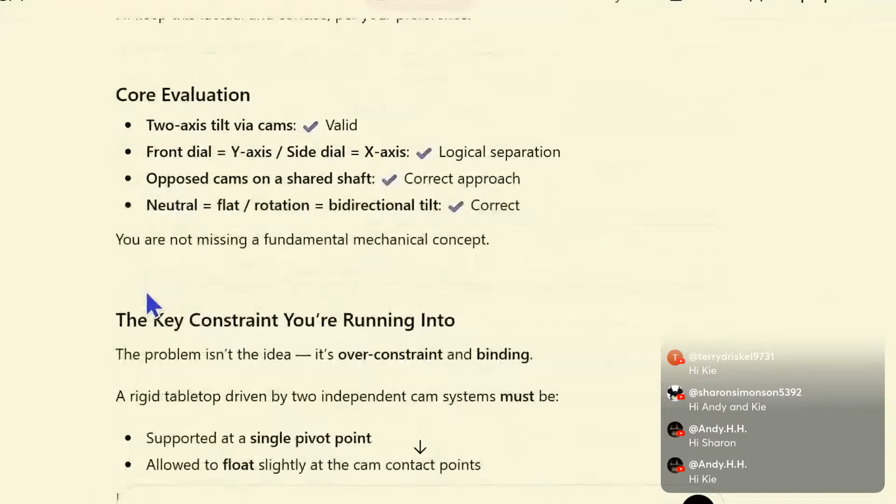And when I put that question to ChatGPT, it responded as such: Your concept is sound and mechanically valid. What you're describing already exists in principle. It's essentially a manual 2-axis tilt table driven by opposed eccentric cams, just implemented in a compact tabletop maze form.

I'll keep this factual and concise per your preference. Core evaluation: 2-axis tilt via cams, valid. Front dial, Y-axis; side dial, X-axis, logical separation. Opposed cams on a shared shaft, correct approach. Neutral equals flat. Rotation equals bidirectional tilt, correct. You are not missing a fundamental mechanical concept.

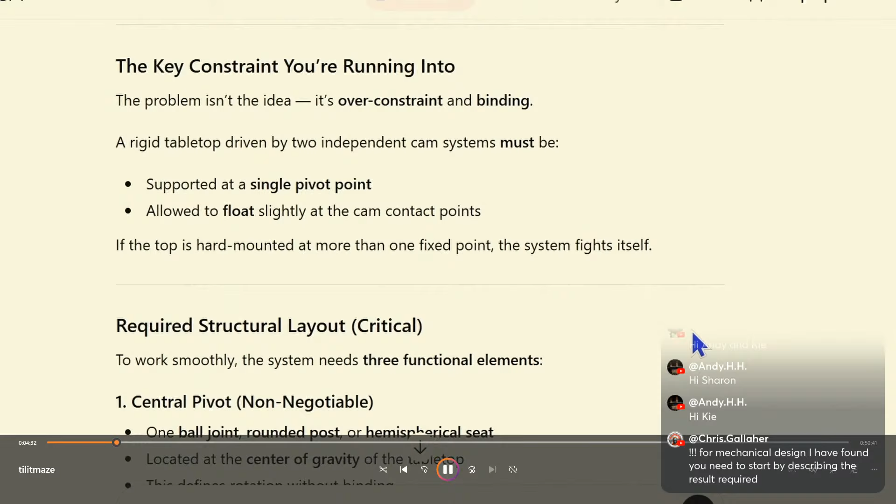The key constraint you're running into, the problem isn't the idea, it's over-constraint and binding. A rigid tabletop driven by 2 independent cam systems must be supported at a single pivot point, allowed to float slightly at the cam contact points. If the top is hard mounted at more than one fixed point, the system fights itself.

Required structural layout is critical. To work smoothly, the system needs 3 functional elements. One, central pivot, non-negotiable: one ball joint, rounded post, or hemispherical seat, located at the center of gravity of the tabletop. This defines rotation without binding. Think camera tripod head, not door hinge.

Two, independent cam axes. Each axis has a single shaft with 2 identical eccentric cams, 1 on each end. Cams push upward only. Why 2 cams per axis: prevents twisting, maintains plane integrity. Three, floating contact points. Cams must contact the underside of the tabletop via UHMW pads, brass wear plates, or captured rollers. No rigid fastening between cam and table.

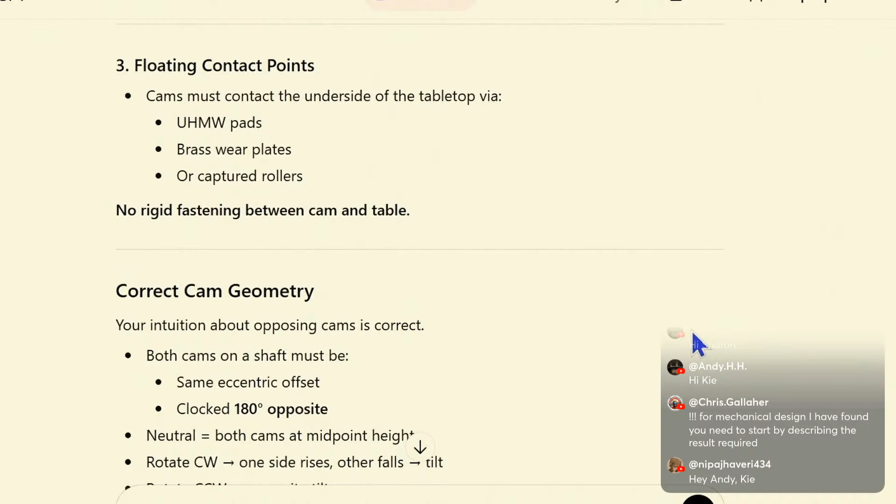Correct cam geometry: your intuition about opposing cams is correct. Both cams on a shaft must have the same eccentric offset, clocked 180 degrees opposite. Neutral is both cams at midpoint height. Rotate clockwise, one side rises, other falls, tilt.

Rotate counter-clockwise, opposite tilt. To explain why your mental model feels incomplete: a cam alone cannot define rotation. Without a central pivot, one cam lifts, the other resists. The table binds or rocks unpredictably. Your brain is correctly detecting a missing degree of freedom.

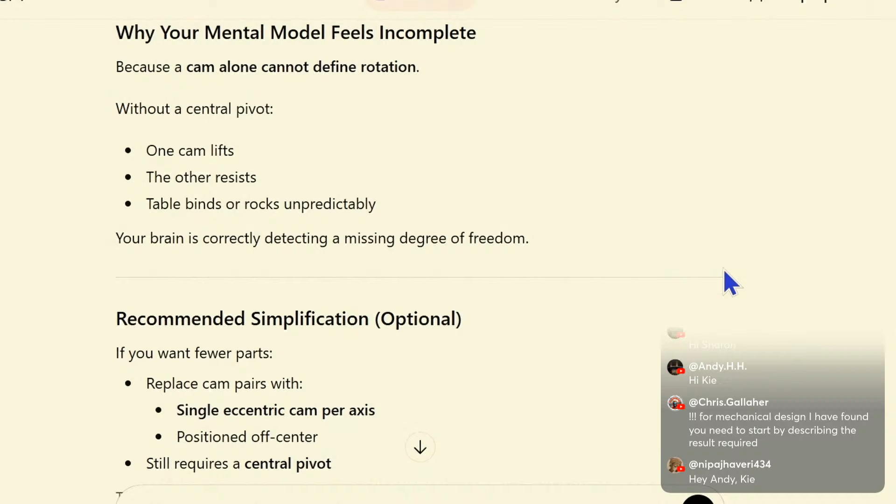Recommended simplification, optional: if you want fewer parts, replace cam pairs with a single eccentric cam per axis positioned off center, but it still requires a central pivot. This reduces precision but works for a maze game. Lightburn relevant design tip: when designing the maze, avoid sharp vertical walls, use filleted corners. Ball diameter should be 2 times wall height. This compensates for sudden tilt transitions.

Bottom line, your concept is mechanically correct. The missing piece is a single central pivot. Cams must push, not constrain. Floating contact surfaces are mandatory. Once you add that pivot in your mental model, the entire system should click into place.

Okay, so there was a lot of good information in that. The non-wearing part, it used some type of non-wearing thin plastic that you can adhere to the bottom where the cams are going to contact the plates as they're rotating, so you don't wear. Without that, you'd eventually wear a groove into it.

Well, I don't think this is going to, if it was in a commercial application, I could see that being absolute. But for this being just a little home game that's going to be played with for once in a while, or maybe for a few weeks and then put it on the shelf and collect dust, I don't think that's something I'm going to worry about.

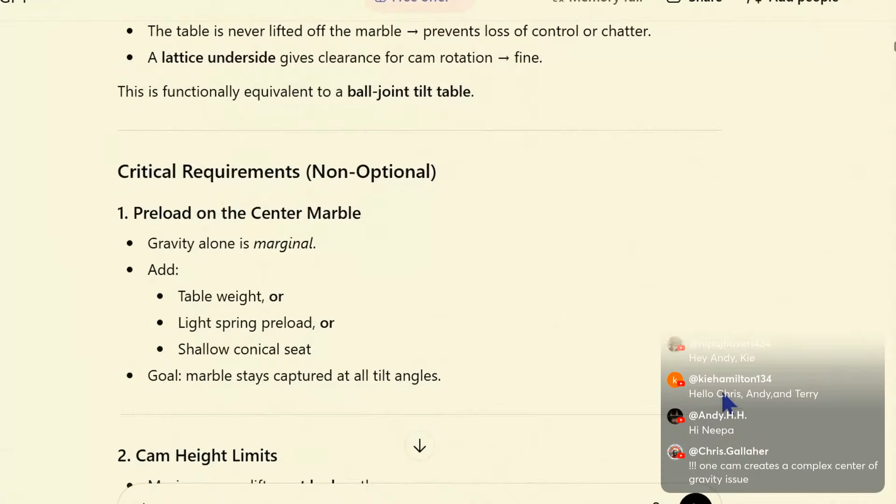Critical requirements, non-optional: 1. Preload on the center marble—gravity alone is marginal, so add table weight, a light spring preload, or a shallow conical seat. Goal: marble stays captured at all tilt angles. 2. Cam height limits: maximum cam lift must be less than the vertical travel that would unload the marble. In practice, cam lift should be 40 to 60% of allowable tilt height. This prevents the table from floating on the cams.

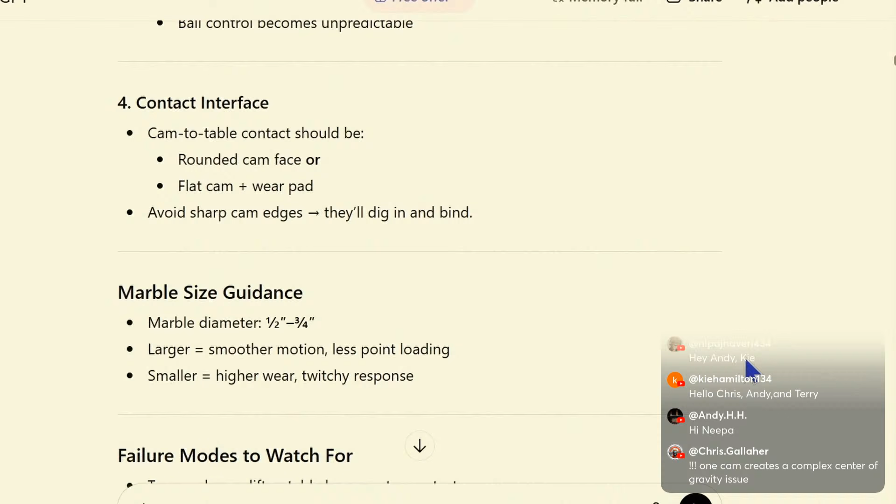The lattice must be torsionally stiff and symmetrical—if it flexes, tilt becomes nonlinear and ball control becomes unpredictable. Contact interface: cam to table contact should use a rounded cam face or flat cam plus wear pad; avoid sharp cam edges, as they'll dig in and bind. Marble size guidance: larger marble equals smoother motion and less point loading; smaller equals higher wear and twitchy response.

Failure modes to watch for: too much cam lift causes the table to lose center contact; no preload causes chatter at neutral; a weak lattice causes twisting instead of pure tilt; cams misclocked causes diagonal bias. Verdict: your lattice plus center marble pivot concept is sound. It will produce smooth, intuitive tilt. It's laser friendly and elegant. You've effectively reinvented a kinematic mount using hobby scale parts. As long as the marble remains the sole constraint point, the system will behave exactly as you're envisioning.

So I'm learning more, and I'm designing in Lightburn as I go, putting some potential designs together, making mistakes. I'm going to include the entire journey of this where I'm implementing and creating parts of the design—I may or may not end up using those in the final piece, but I'm going to show you this entire journey as we go.

So next I asked it: how about a simple disc cut out and glued to the center underside of the table, with an inward offset cutout to allow the pivot marble to engage in it? Essentially, cut out a ring, glue it in the center, and then put the marble in the center of that ring.

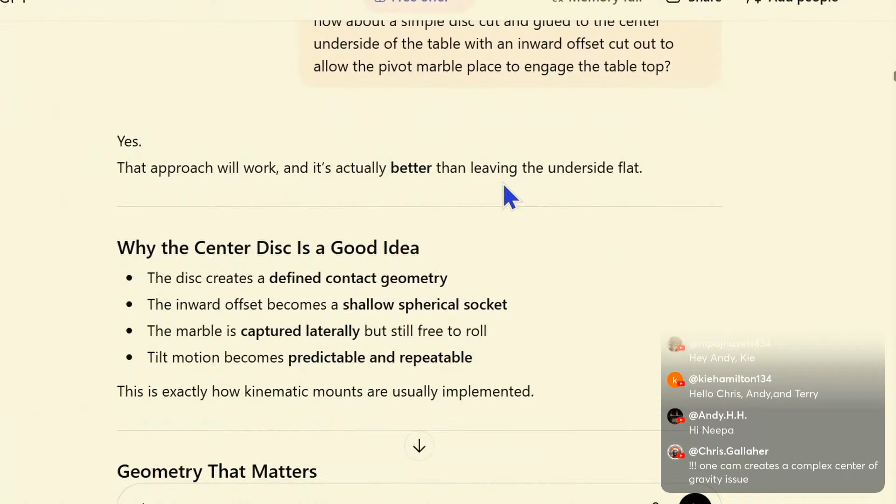It said yeah, it's actually better than leaving it flat on the underside, and went into detail about how to do that and why it works. Then it kept talking about ultra high molecular weight polyethylene, which it recommended to prevent wearing, noting it's actually self-lubricated. This was way more than what I needed to do.

So then I went on down and said, well, what about the clear plastic sheets I purchased for picture frames, in place of the UHMW? It said yeah, that'll work. We go on, and I end up not doing any of that because I don't think I'm going to need that for my home game.

Then I asked: when it comes to positioning the cams, should they be closer to the pivot point or as far away as possible? It said as far away as possible—that's the correct placement. Why distance matters: the cam produces linear lift, but the table responds in angular rotation. Angular change equals lift divided by distance from pivot, so farther from the pivot, smaller lift is required.

Place cams near the perimeter of the tabletop. Keep them symmetrical about the pivot. Leave enough margin so the table doesn't teeter off the pivot, so the lattice remains stiff. Rule of thumb: cam radius should be 70 to 90% of the table half-width.

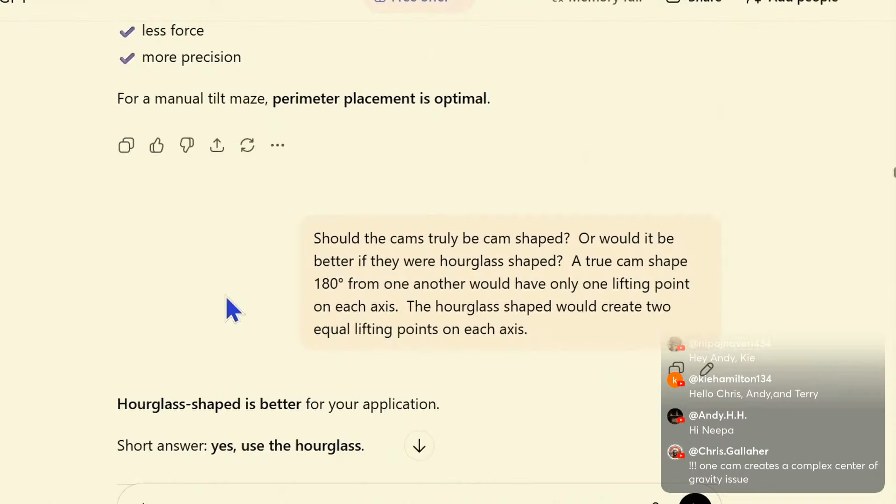Should the cams truly be cam-shaped, or would it be better if they were hourglass-shaped? A true cam shape, 180 degrees from one another, would have only one lifting point on each axis. The hourglass shape would create two equal lifting points on each axis.

And it replied: hourglass shaped is better for your application. Short answer, yes, use the hourglass.

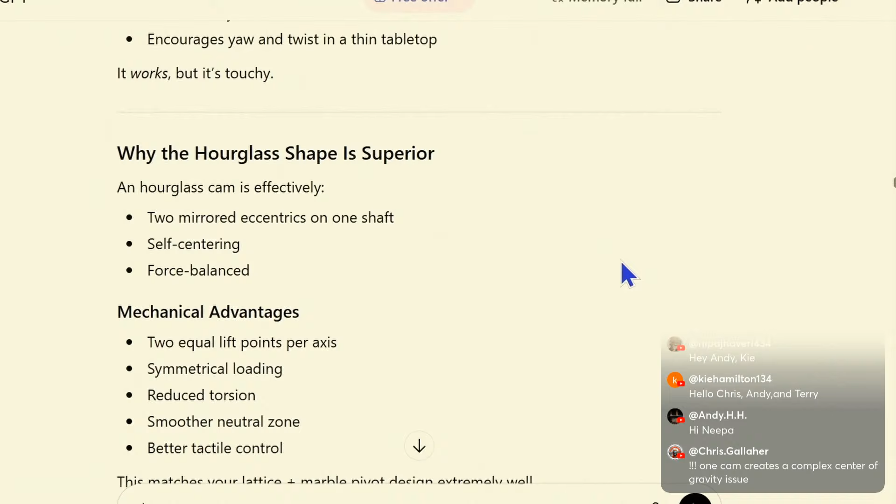Why a true eccentric cam is suboptimal: a simple eccentric cam has one lift lobe, creates a single contact point per axis, produces asymmetric force, and encourages yaw and twist in a thin tabletop. It works, but it's touchy.

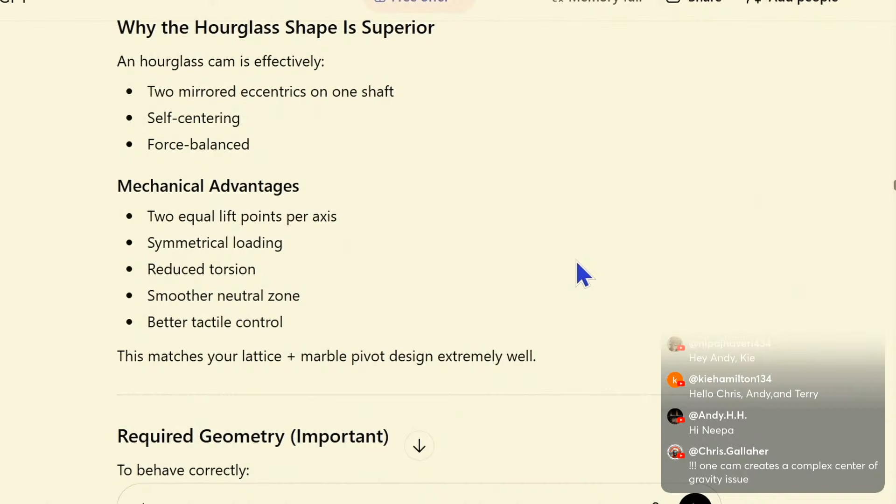Why the hourglass shape is superior: an hourglass cam is effectively two mirrored eccentrics on one shaft, self-centering, force-balanced. Mechanical advantages include two equal lift points per axis, symmetrical loading, reduced torsion, smoother neutral zone, and better tactile control. This matches your lattice marble pivot design extremely well.

Required geometry is important. To behave correctly, the two lobes must have identical radius, identical eccentric offset, and be clocked 180 degrees apart. The waist must clear the lattice at full rotation. For neutral behavior, the waist under the table equals neutral.

Rotate clockwise, one lobe rises while the opposite falls. Rotate counterclockwise, reversed. You get bidirectional tilt without dead spots.

Fabrication notes: cut as a laminated profile, stacked layers, or a single thick disc if material allows. Light edge rounding reduces wear. Add plastic wear pads on the table.

Bottom line: hourglass cams give balanced, predictable tilt, less binding, better feel, and more forgiving alignment. For a precision feel device like a tilt maze, the hourglass geometry is the correct choice.

There are still some caveats that I have not run into in my mental design process. I'm not using any other software besides Lightburn. I'm not using any 3D CAD that would help me see those interferences as I'm designing. So I'm having to do all this in my mind, and that's a scary place, I've told you.

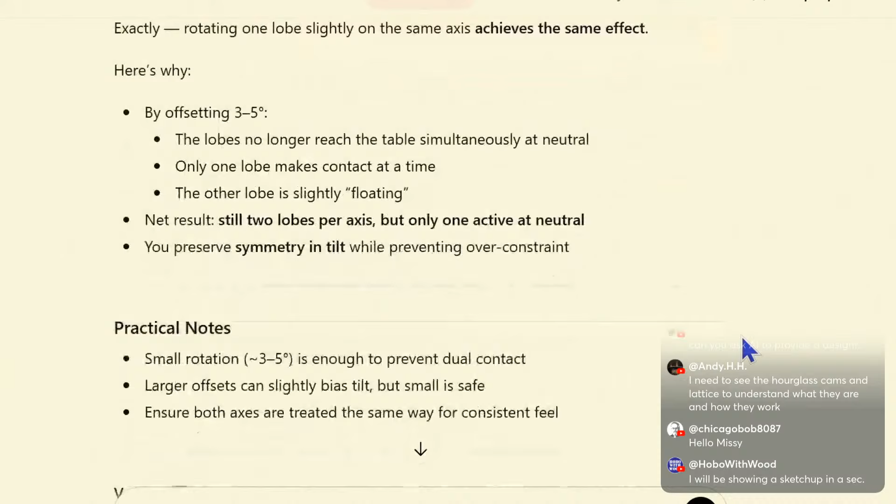Exactly. Rotating one lobe slightly on the same axis achieves the same effect. Here's why: by offsetting 3 to 5 degrees, the lobes no longer reach the table simultaneously at neutral. Only one lobe makes contact at a time; the other lobe is slightly floating. Net result: still two lobes per axis, but only one active at neutral. You preserve symmetry in tilt while preventing over-constraint.

This configuration should create at most a 3-point contact, right? And it said yes. I'm like, okay.

All right, then I said, I've been thinking about the hourglass shape of the cam as opposed to the standard single-sided cam. If the cams are offset from each other 3 to 5 degrees, one of the cams would never actually come into contact with the bottom of the maze unless it got uneven. Is the hourglass shape actually necessary? Maybe standard opposing cams that were slightly rotated on the dowel 3 to 5 degrees would prevent the opportunity of both cams making contact with the bottom of the board at the same time, or is the hourglass shape needed?

So now I'm starting to question, do I need to do the hourglass? I still haven't gotten to the intersection of the X and Y yet, but I'm starting to draw. I'm like, okay, I don't know that the hourglass is going to be beneficial or even needed. And that's what I asked it, and it replied.

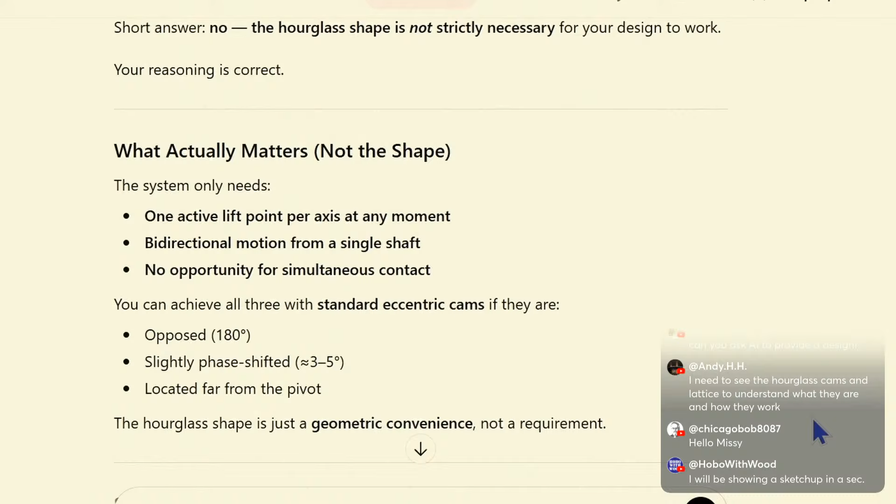Short answer, no. The hourglass shape is not strictly necessary for your design to work. Your reasoning is correct. What actually matters is not the shape. The system only needs one active lift point per axis at any moment, bidirectional motion from a single shaft, no opportunity for simultaneous contact. You can achieve all three with standard eccentric cams if they are opposed 180 degrees, slightly phase shifted 3-5 degrees, located far from the pivot. The hourglass shape is just a geometric convenience, not a requirement.

Standard opposing cams set: this configuration gives you one cam lifting while the other floats. No over constraint, full bidirectional tilt, simpler fabrication, easier tuning, shim or rotate. Mechanically, this is equivalent to the hourglass solution for a maze.

What the hourglass actually adds: guaranteed symmetry without tuning, self-centering neutral feel, two potential lift points if geometry drifts. Those benefits matter more in high precision fixtures, heavier loads, and automated systems.

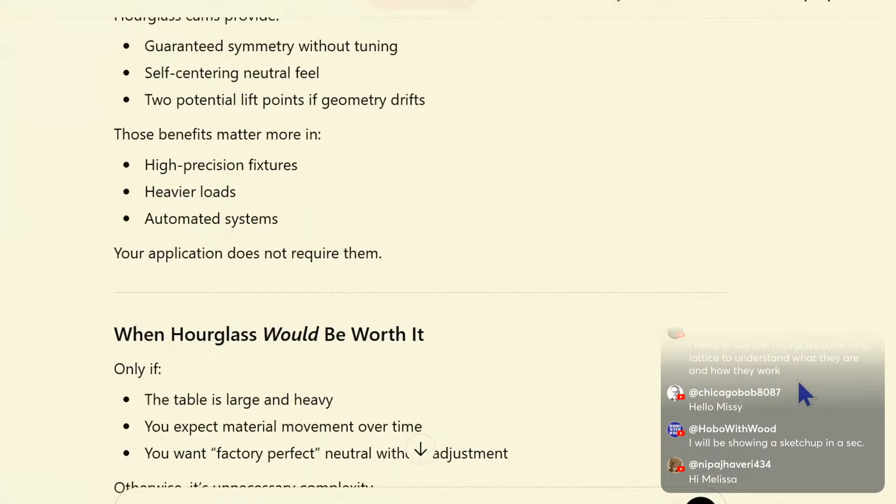Your application does not require them. When would hourglass be worth it? Only if the table is large and heavy, you expect material movement over time, or you want factory perfect neutral without adjustment. Otherwise, it's unnecessary complexity.

Recommendation, practical: for your project, use simple eccentric cams, mount them opposed on the shaft, rotate one cam 3 to 5 degrees, use wear pads under the table, and keep the center marble preloaded.

This is mechanically clean, easy to build, and fully correct. Bottom line, hourglass cams are optional, not required. Standard cams with slight phase offset work just as well here. Simpler design equals fewer failure modes. Your instinct to simplify is right.

Okay, so I'm making progress, and in fact, I go through a whole lot of drawing and test fitting and conceptualizing in Lightburn for the actual dowels and cams before I even begin to draw the box and the lattice and everything else that's going to be needed.

As far as the exact information, I had to rough out the box and create where the marble location is going to be, so I know where the maze tabletop is going to be setting on the marble, so I know where the cam is going to come into contact with the bottom of that maze. So I have to have that geometry prefigured so I know how to design the cams.

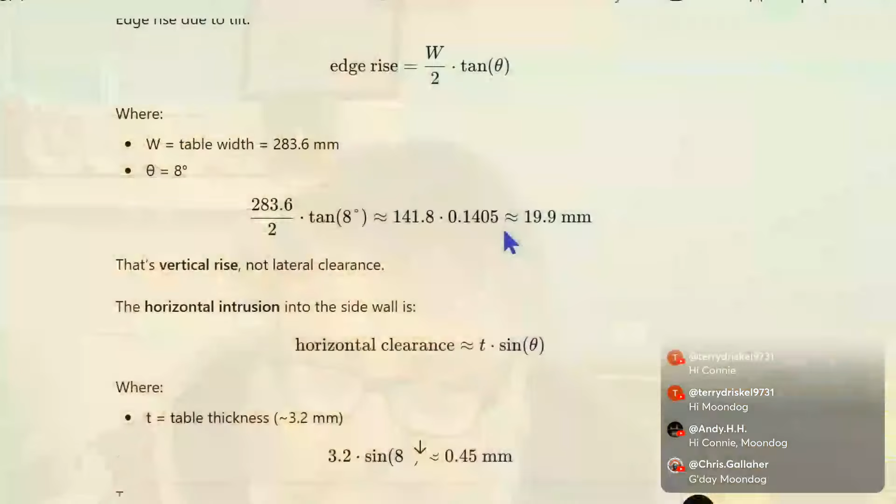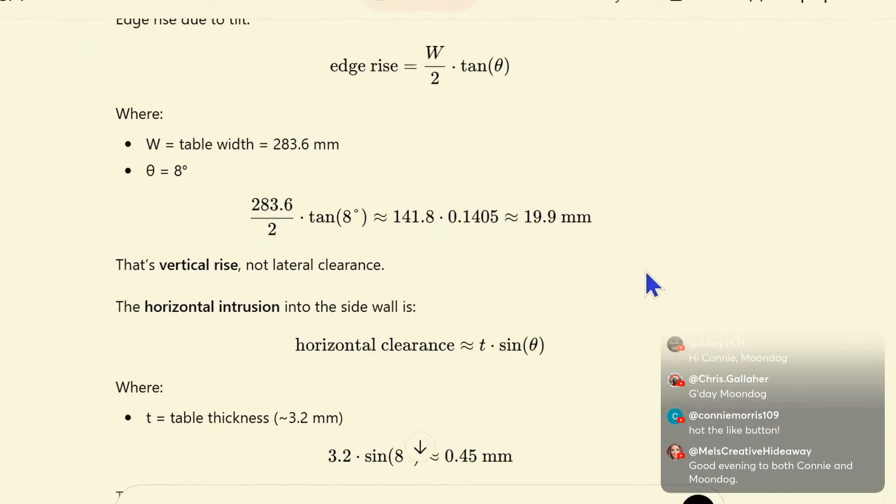Practical maze tilt angles: for a marble maze, useful tilt runs 5 to 8 degrees. Above 10 degrees, the marble becomes uncontrollable. Will design for 8 degrees max. Clearance math, simple and safe: edge rise due to tilt. Edge rise equals W over 2 times tangent of the tilt angle, where W equals table width, 283.6 millimeters. That calculates to approximately 141.8 times 0.1405, approximately 19.9. That's vertical rise, not lateral clearance. The horizontal intrusion into the side wall is approximately T, where T equals table thickness, 3.2 millimeters.

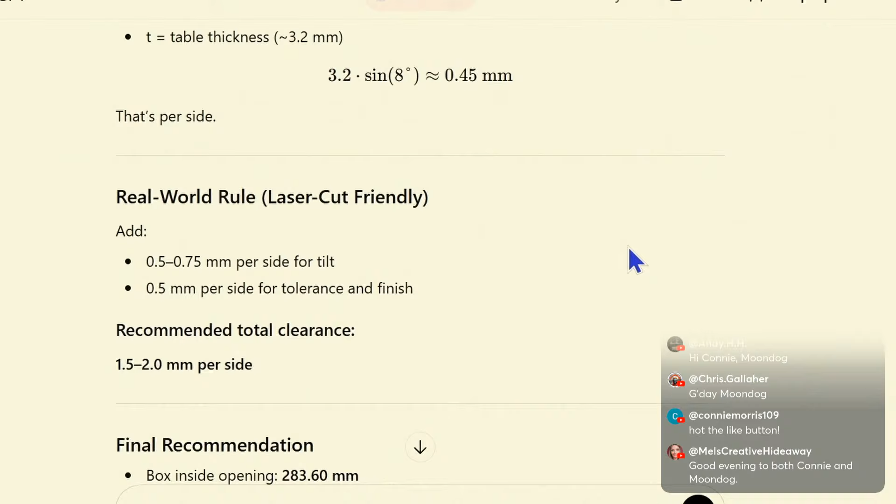0.45 per side is a real world rule, laser cut friendly. Add 0.5 to 0.75 millimeter per side for tilt, 0.5 millimeter per side for tolerance and finish. Recommended total clearance is 1.5 to 2.0 millimeters per side.

Bottom line, small enough is not a guess. For your dimensions and tilt range, open quote, 3.5 millimeters total undersize, 1.75 millimeters per side, is the sweet spot, close quote. That will feel intentional, not loose.

Did you get all that? I didn't, but all that matters is it told me what the bottom line is, what it needed to be for those dimensions.

And it's a good thing I didn't have to do all the math. I could have actually told ChatGPT to forego all the explanations and just give me the answer. But you can see here that there needs to be a lot of thought that goes into it, especially when you're creating mechanical pieces. There's a lot to consider.

That's why the price of my designs have the price that they have. Even when I'm using ChatGPT like this, it's recognizing the need, even though I don't know how to do it myself. I recognize the need for these allowances and all that, and I can get by with hopefully just version 2.0 and have a design ready for you guys.

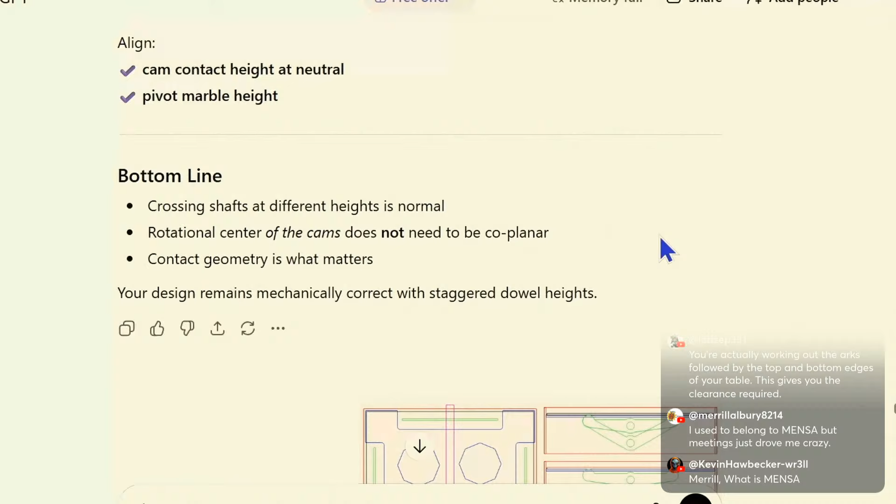Common mistake to avoid: do not try to align dowel center lines, shaft heights, or cam base circles. Align cam contact height at neutral pivot, marble height. Bottom line: crossing shafts at different heights is normal, rotational center of the cams does not need to be coplanar. Contact geometry is what matters. Your design remains mechanically correct with staggered dowel heights.

So I'm starting to get some sketches done in Lightburn, and in my initial draw up of this, I did make a mistake.

I actually made several mistakes. Even when I thought I had them all corrected and cut out the first prototype, there were still some adjustments that needed to go back and be made. One of the things I failed to do is accurately allow for the height of the pivot point of the marble. I didn't have that position correct. But I ended up drawing and sketching all this out in Lightburn.

In ChatGPT, you're able to upload images and ask it to look at these and tell me what you think. So I don't know if I can... yeah, I can. So here is an image, and I'm going to show you this and explain a little bit.

This is going to look very confusing, but this over here is the lattice. The blue is just the lattice shape. The green is the cams. The pink is the dowel. This area here is just cut out waste to decrease the weight of the overall piece. And the orange here was that ring that I was going to put in the center to position the marble for the center point.

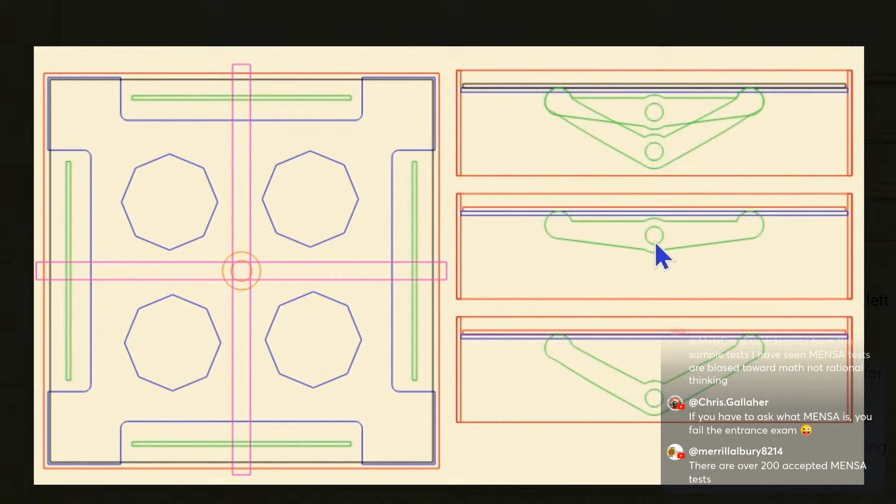This is a top-down view looking at the lattice and the positioning of everything. This is a side view. This is, say, I don't know if this was X or Y, and this was the other opposing, and then this is the two combined. So here you can see I've got one dowel up high, one down low. Whenever you position them with one over the other, you got plenty of clearance here. You can see the shape of the cams I've created, and if you were able to zoom in here, the points of contact are exactly the same, even though the shapes are completely different.

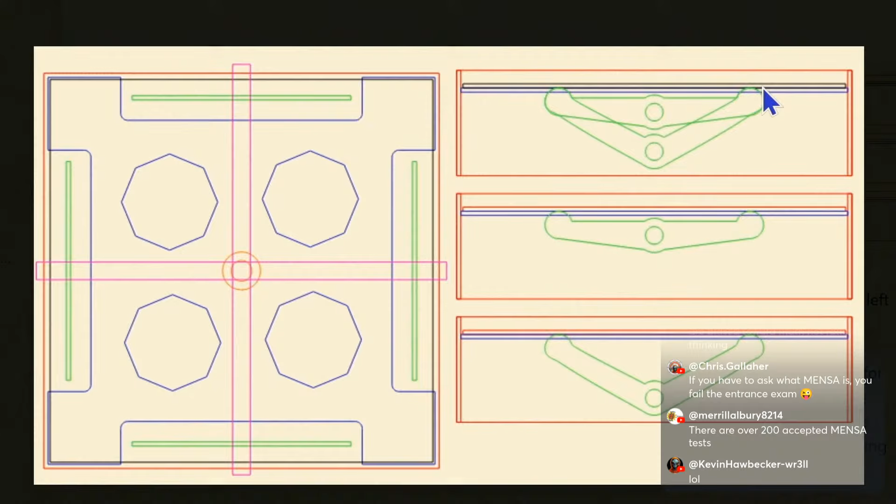So I said, I'm going to share a couple of drawings with you. The leftmost is a top-down view. The red layer is the outer perimeter. The blue layer is the lattice that will rest just beneath the maze top. The black layer is the perimeter for the maze top. The green layer represents the cams. The pink layer is the dowel positioning, and the orange is the center pivot ring. There will be a ring on the lattice and on the bottom of the maze. The top right is a side profile that shows positioning of the axis in relation to one another. Right, middle, and bottom show the individual side profiles and the positioning of the cams.

Do you see a problem so far? And it replies: I see what you're doing, and overall this is a coherent, workable layout. Nothing jumps out as a fundamental flaw. I'll go through it systematically and point out the few things to watch, not redesign it. High level verdict: geometry is sound, degrees of freedom are correct, no obvious overconstraint, shaft crossing handled correctly, cam logic matches the earlier discussion. You're past the concept risk stage. This is now in tolerance and execution territory.

Top-down view left, what looks good? Cam placement near the perimeter, correct leverage, symmetry about the pivot, predictable tilt, central marble ring alignment, correct reference, lattice clearance slots, you've anticipated cam sweep, no issues here. One thing to check: the green cam sweep slots in the lattice, make sure they clear the full cam envelope, not just the lobe. Include a little angular over-travel, 5 to 10 degree safety. This is a common 'looks fine in CAD, rubs in reality' point.

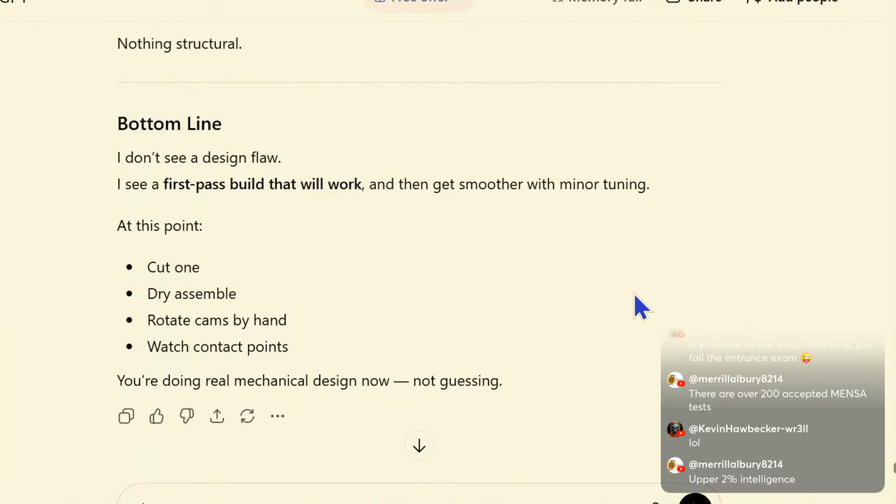Bottom line, I don't see a design flaw. I see a first pass build that will work and then get smoother with minor tuning. At this point, cut one, dry assemble, rotate cams by hand, watch contact points. You're doing real mechanical design now, not guessing.

It doesn't realize that this ain't my first mechanical design. The gumball machine I did without the assistance of ChatGPT, and that one was really challenging because it ended up having multiple gears, and I'm really proud of the way that came out.

If you haven't seen the gumball machine, it's on the website, hobowithwood.com. It's a fully functional gumball machine. The only challenge is I've been told that the mason jar, or the jar I used that I got from Hobby Lobby and mentioned in the design process, may or may not be available, but I think it's pretty much a standard mason jar opening. So I just didn't go with the real tall quart, I went with the little half quart just for looks, and you don't need that many gumballs, they go stale and hard.

So I've done some mechanical stuff, and it said, hey, you're doing some real mechanical designing now. All right, so it told me essentially that, hey, you're on the right track, and that's going to work. If anything, now all you got to do is worry about the fine tuning.

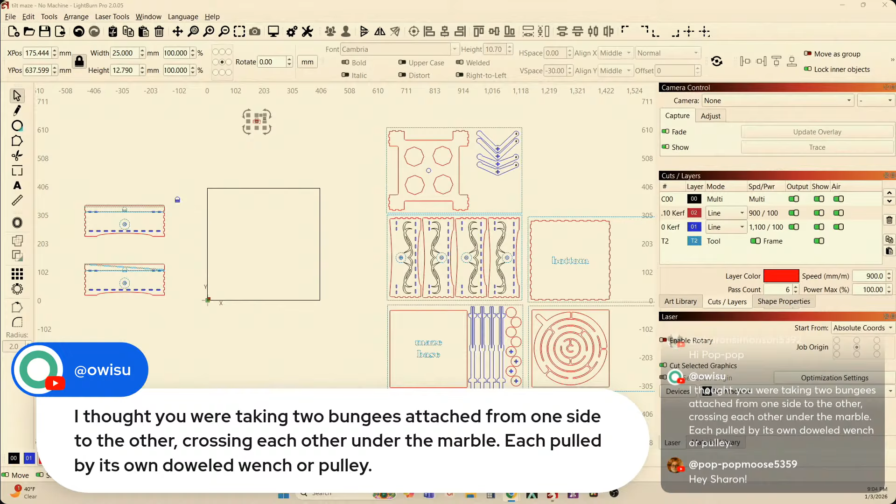No, each pulled by its own dowel, winch, or pulley. Yeah, bungees would be something too. And hey, I love to say it: there's always another way. Could you use a pulley system, something like that? Yes, you could. Is that the right way or the wrong way? No, it's just a different way.

I like using, when I'm creating, what I have in my environment, which is the wood. I've been salvaging my marbles—this is on the design somewhere on the website. It's a lamp that I made, and it has the top that's missing, and I've been salvaging the marbles out of it, using it for different things. So I had marbles here and I had wood here, and that's what I decided to use.

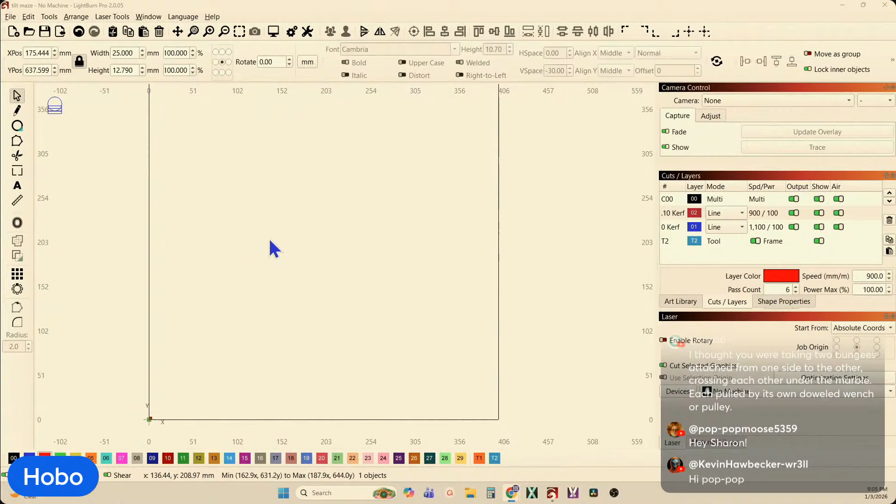All right, so let's go over here and start with our knowns. Let's say if you're going to use a marble for a pivot point and it is a 16 millimeter marble, and you're going to create that pivot point by having it rest in a hole, and the hole you're going to cut is going to be smaller than the diameter—15.5 millimeters—and 3 millimeters is the material thickness. I got my aspect ratio locked, let's do that and go 15.5. All right, so that is a cross section of the hole that you're going to cut out in order for the marble to set in, and you see that that's obviously smaller.

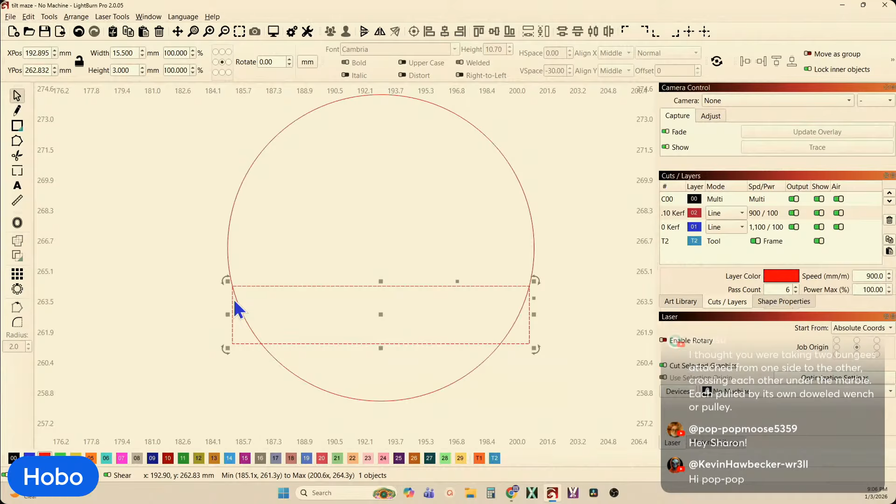Well, if you take this and you start moving it down until you get it to where right there's how far that marble is going to set down in that hole. So now if you were to take and measure from the top of the marble straight down to that top surface, that right there is going to give you a 10 millimeter pivot point. The height is going to be 10 millimeters above the surface. And that's what my initial design was, only 10 millimeters. I needed to double that—that's why I had practically no rotation or no tilt whatsoever.

Now let's figure out—if you didn't already know that 20 millimeters is what I wanted, I needed to figure out how high it needed to be to obtain 8 degrees of rotation. This is what I would do. If I've got a piece...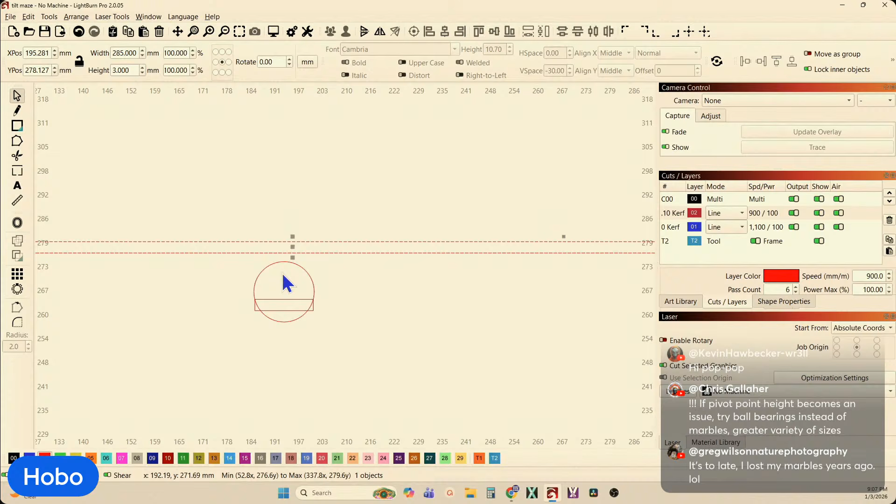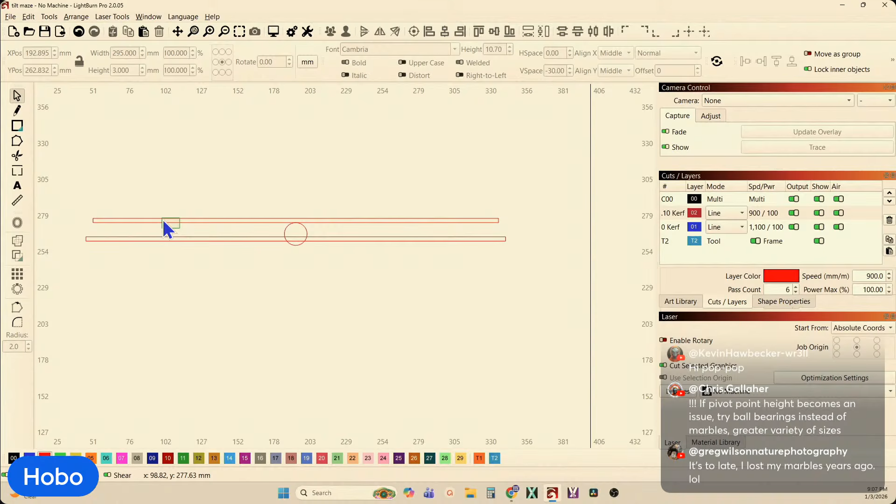That we'll say is going to be 285 wide and 3 mil thick—that's going to be the maze, right? That maze is going to be sitting on the center there; that's where the maze sits. Now this represents the lattice, and if that's also 295, we're going to say—or there you go—if I want that to rotate 8 degrees, I need it to tilt 8 degrees.

What did Chris say here? If the pivot point height becomes an issue, try ball bearings instead of marbles—greater variety of sizes. Well, I've got a solution for using the exact same marble. Real simple fix, and actually this is my approach to creating the correct pivot point height, and it's better than going out into the real world to Harbor Freight or Lowe's and Home Depot trying to find the right size bearing. I know that I've got a 16 millimeter marble, and I know that when it's sitting in a 15.5 millimeter hole, that it leaves 10 millimeters of height.

I know that. Well, all I have to do is create a base that will sit however high I need it to be above the lattice, that hole will be in, that the marble will sit in. And now I can control to within a fraction of a millimeter whatever right height, or pivot point height, I need it to be. And I do completely understand, totally understand. All right, so—

Here, if I would have—and see, I didn't fully understand the geometry that was taking place. I didn't understand what was happening when I was asking the tabletop to tilt. We're creating a triangle with the pivot point being one point of the triangle, and then your cams being the other two points of the triangle. There's 3 points of contact: center point, and then the point on the X and the point on the Y. And you need to be able to drop from that center point—it needs to drop down and away in order to get that tilt.

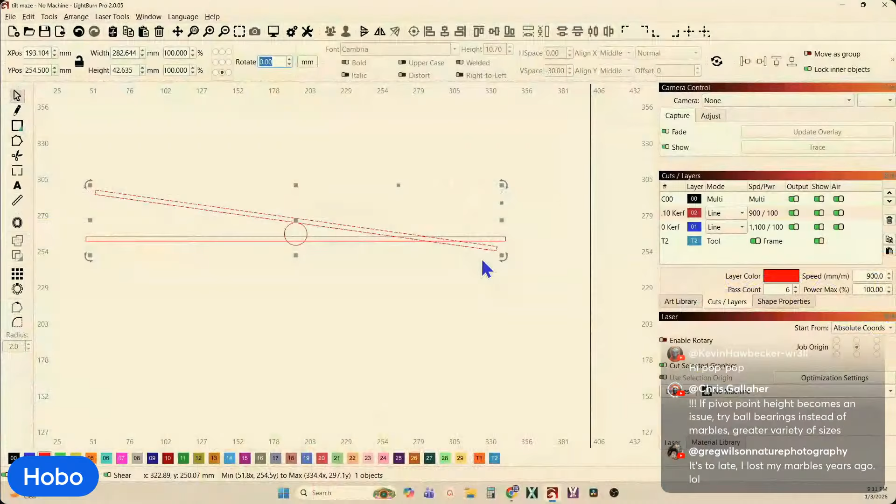But in order to achieve 8 degrees of rotation there, I've got to lift that center point in order to get that full 8 degrees. I just measured that was 10 degrees, or 10 millimeters of height from the top of that marble to that, what was essentially the lattice.

So I'm going to change my move tab to 10 millimeters and say okay. And now if I take and select both of those and just move up, look at that. Look at that. If I only understood why I needed to have that to happen, I didn't understand it.

I didn't understand it. And Carl, I'm the same way to the visual. That's why I can't do the math. I don't know the math, and I don't understand how or why to do it. But I didn't know what to look for. That's my initial questions to ChatGPT whenever I was wanting to figure out this design.

That piece of information, I didn't know that I needed a center pivot point. And it told me flat out in the very beginning, if you go back and watch it, it says the one thing you're missing is your center pivot point. You need that in order for the system to work. But it did not stress to me how crucial the height of that center pivot point was.

Nor did it express, and I'd already given it the dimensions of the top of the maze and all that, not initially, but halfway. It could have said, hey, you're doing this, now you also need to incorporate that, and your pivot point needs to be this. Well, it doesn't volunteer the information that you need. It will give you the answers that you want and not tell you what you need to know.

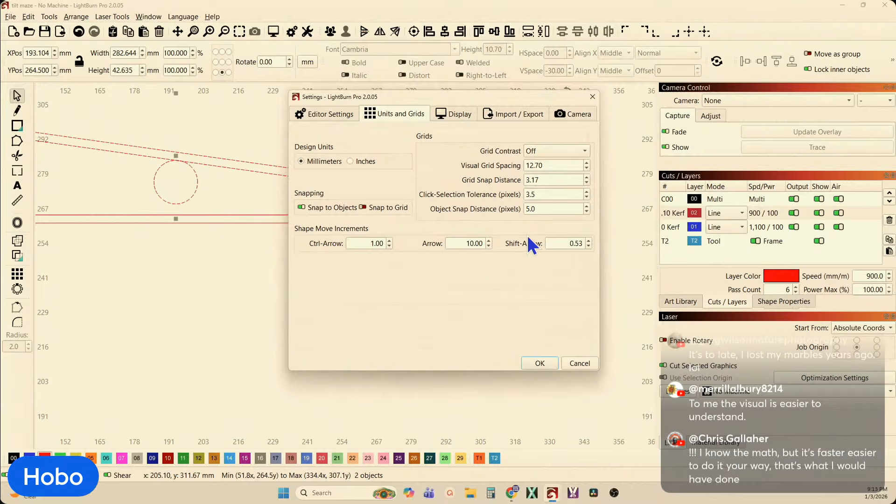But if I didn't know that, if I had my movement set to, okay, control arrow is 1 millimeter, so let's put this back down, and there's where you're starting. It's like, okay, well, how high does it need to be? You can use your measurement tool to measure from there straight down and say, okay, well, there's 10 millimeters. That's where I'm starting at, and it don't work.

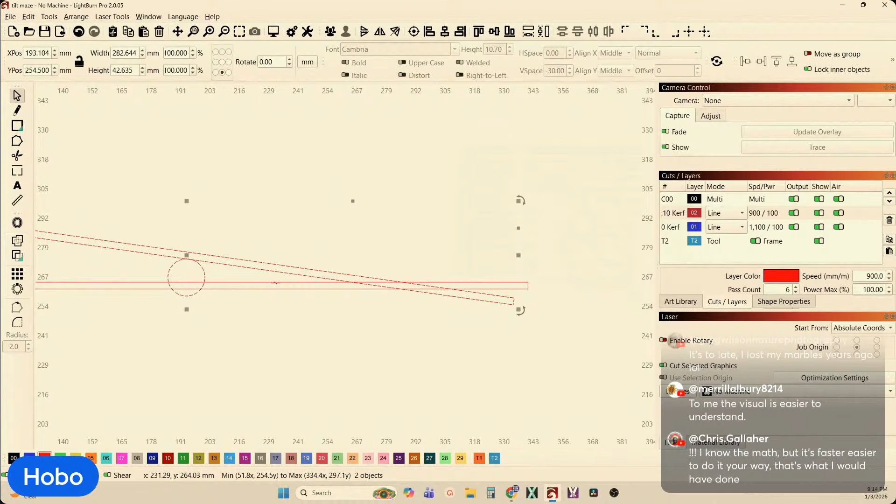So got them both selected, and my control arrow is 1 millimeter. I can just start moving it up. 1, 2, 3, 4, 5, 6, 7, 8, 9, 10. And okay, now I know an additional 10 millimeters is all I need to clear my pivot point height.

And Chris says, I know the math, but it's faster and easier to do it your way. That's what I would have done. Yeah, the problem is this: to visualize it is so much easier when you know what you need to be looking for. I didn't know the center point was the key. The center pivot point to a tilting table of any type is your center pivot point.

Now, so there's where it needs to be. Well, if I had that 15.5 millimeter, or actually, you know what, it's going to be bigger than that. I'm going to say we're going to go width be 25 millimeters, 25.4. We make it a full inch and 3 millimeters. Put my anchor point back in the middle and let's bullseye those.

All right, so now I need to get this to where it's going to just intersect. Actually, you know what, I need to get that actually at 15.5.

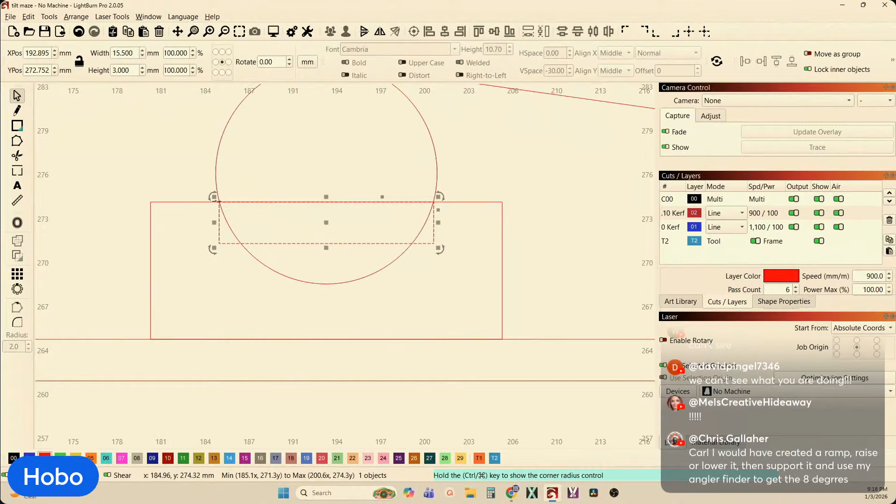So there is the hole - that's a 15.5 millimeter hole, that would be cut for the marble to sit in. And I found out where the intersection would be in order for that to work out.

So I would take that, and I can delete that for now. I'm going to duplicate those two, bring it down here, and then say A, subtract B. That gives me the basic shape.

The distance from here to here was 4 millimeters. So I need to make that so those will interlock - it would be 3 millimeter material and 2 millimeters tall, and it would be in the center bottom.

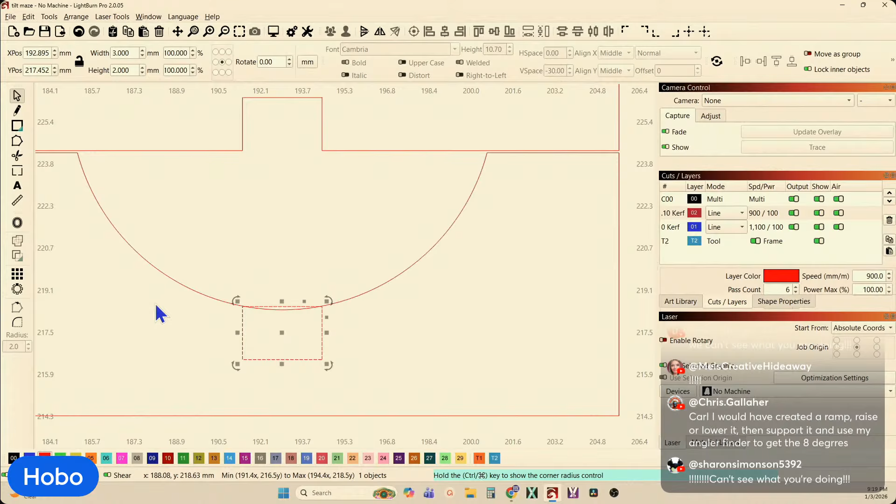And we need to duplicate that, and then say A, subtract B. And then put this one up there and say A, subtract B. And clean that up right there. But then those would interlock with one another.

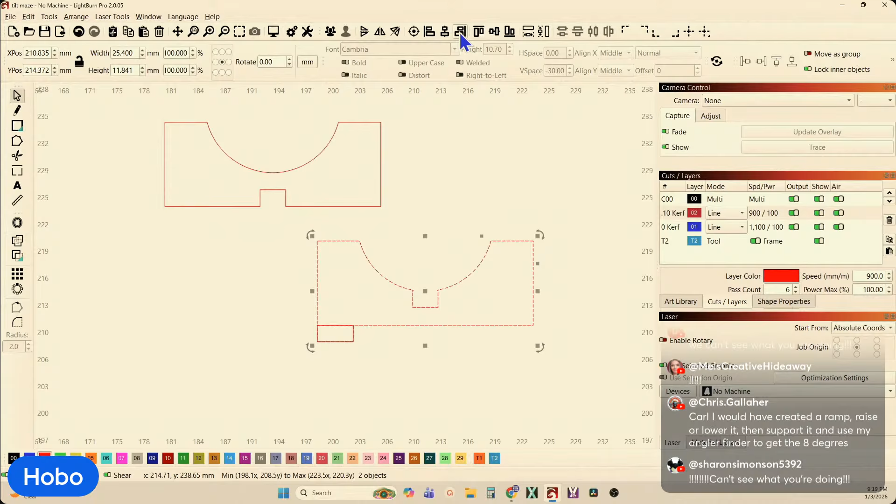And the marble would sit right in there. And then you'd put a couple of tabs on here. Weld that all up and then put that on your lattice where the hole is now, and that's going to lift it up and put the marble in there, and you've had perfect control of setting your height of your pivot point.

How about a socket on the upper table for the marble to set in? I asked about that in ChatGPT, and I cut that video short because I know some people were starting to drop out. It said that having two rings could cause some constraints, could cause some binding, and it didn't recommend doing two - having the one in there fixed, okay.

But doing it this way, I don't know - you could always try it, and as long as everything was clean, smooth, sanded. It even talked about using a little bit of oil to lubricate things. It may help - it would definitely keep your maze top in position.

A socket will give too much contact area. Yeah, that's what it's talking about - it could cause some binding and some constraints. It talked about using a dimple, but we can't do that with our CNCs and our lasers. You could take your marble and tap it with a hammer and put a little dimple in it, but...

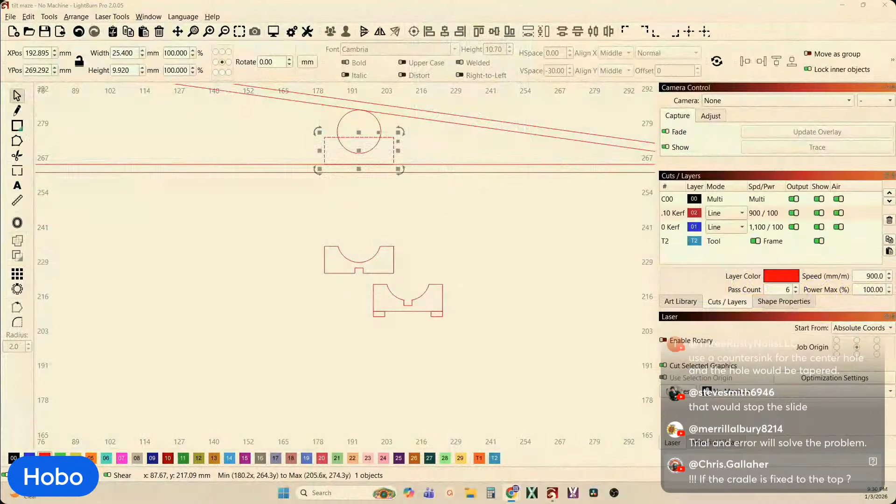Instead, I'll just show you. Let's go back over here. Initially, on my cams, my thought process was... keep ungrouping here, there we go. The way my dowels work, I've got pieces that interlock with each other, so they're not round dowels. They're interlocking pieces of 3mm material, creating an X shape that will rotate.

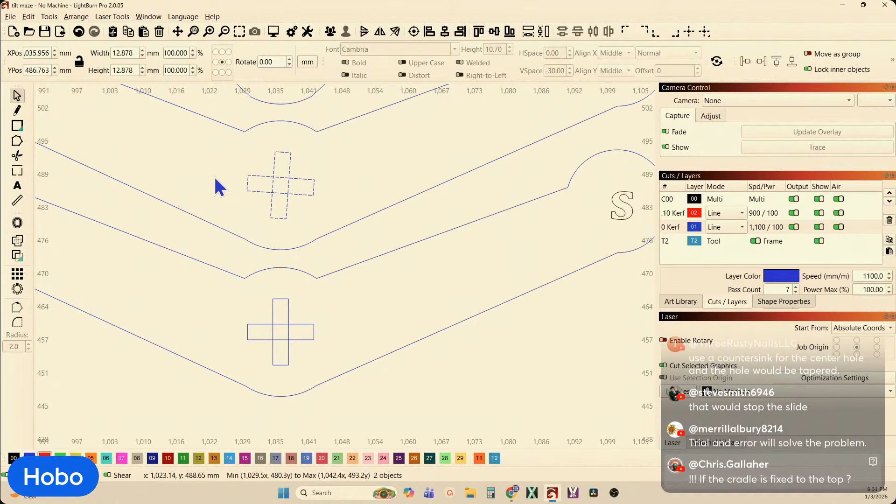I can use that X in order to put my dowels, or my eccentrics, or my cams on the dowel. In order to prevent having all of them at the exact same height, so I didn't have the 9 points of contact, I initially thought that if I were to simply come in here, and I asked it, and it said specifically rotate it 4 degrees. So I said okay, I'll rotate that 4 degrees. So now I've got one like this, and this one like this, mounted on the same dowel.

So now they don't make contact at the same time, so I thought, okay, problem solved. That don't work. Not only does it not work, it creates a problem. What did finally work...

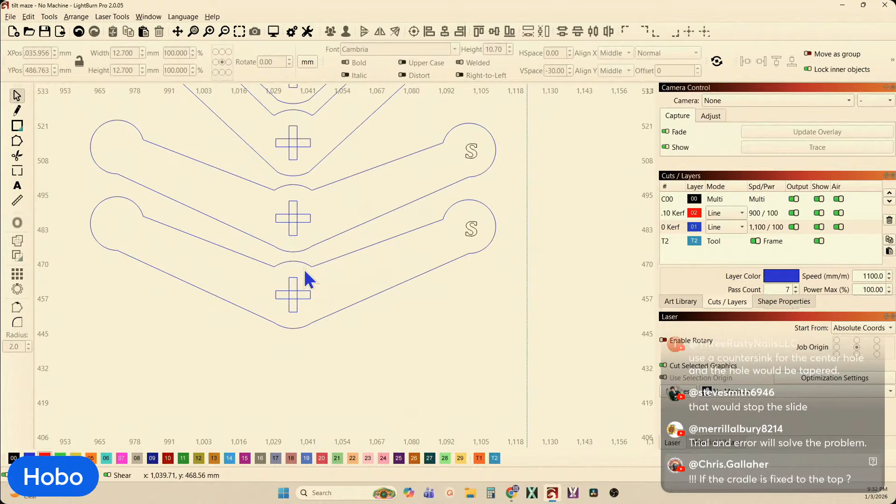is actually lowering the lobe, or the cam, on one side of each piece here. So if I undo that, put that back. If I bring this over, let's duplicate this, bring it up here, and bring a guideline down here to here. See, that is actually below. Let's bring up here, select it, then select this one and Alt-Shift-V. That shows to be... but Alt-Shift-V did not put it at the center. Let's put it right at the top. There we go. So there is right on the line.

We come over to the other one, though. It's a little bit lower. And what little bit? 1.1 millimeters.

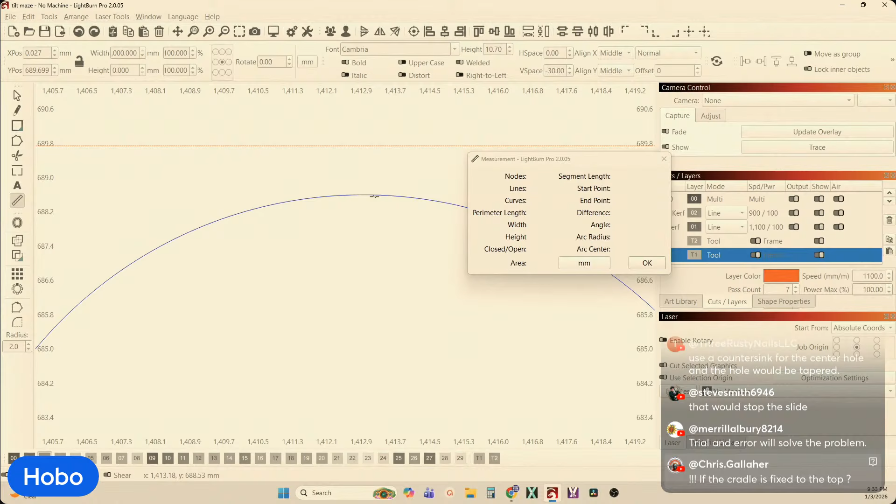Whenever I finally came to the realization that rotating it on that axis didn't work and went back to it, it said, oh yeah, no that won't work. You need to lower the one lobe on that eccentric, and it needs to be lowered. It told me whatever that came out to be, just a millimeter or a little less. And I'm like, seriously, that's all? How's that going to make that much difference?

GPT didn't know it initially because it didn't volunteer the information. Only after I presented it with the problem did it say, oh wait a minute, this will work.

If the cradle is fixed at the top, no. Alt-Shift-V took into account the difference between the height of the lobes. I figured it was just because of the curve, like it does in text. But anyway...

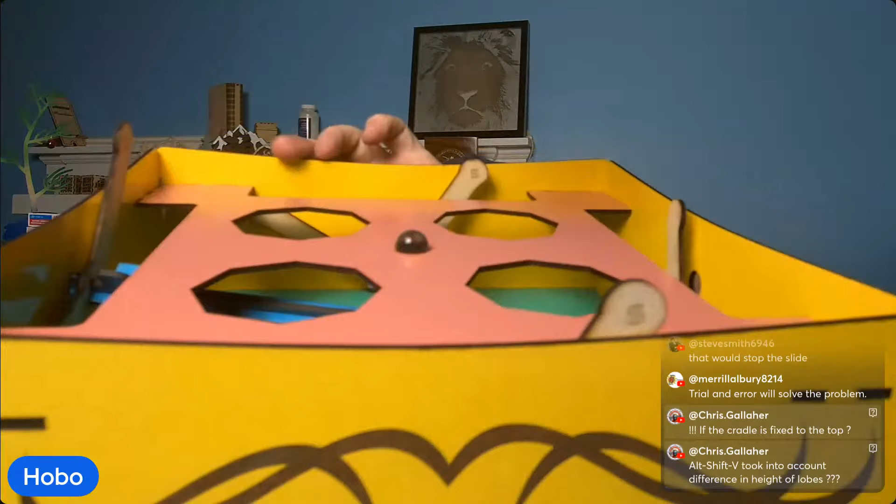This is the one that's lower. This is the one that's lower. And when you put these together, you need to have both of those lined up with one another. So you can see the S's are on the same side of the dowel. And there - you can barely see it.

Wait, where are you at? There you go - oh, wrong way, Conway. But anyway, that way you're keeping the symmetry the same, you're keeping the geometry lined up. And that 1 millimeter adjustment made a tremendous amount of correction.

So now that I've got that figured out, I've got the cams figured out. I know about making that offset. I know about needing to have the 20 millimeters of pivot point height in order to get 8 degrees of tilt.

Now I can start at the top and work my way down, start at the roof and come down to the foundation, and get everything positioned correctly into a box that will give me the proper tilt and work.

Symmetrically or diagonally opposed, I've got them on the same position. Let's see here. There, well yeah, because both of them were on the same side. They're not diagonally opposed. But now you got me asking myself questions. Do they need to be diagonally opposed? Because of the rotation?

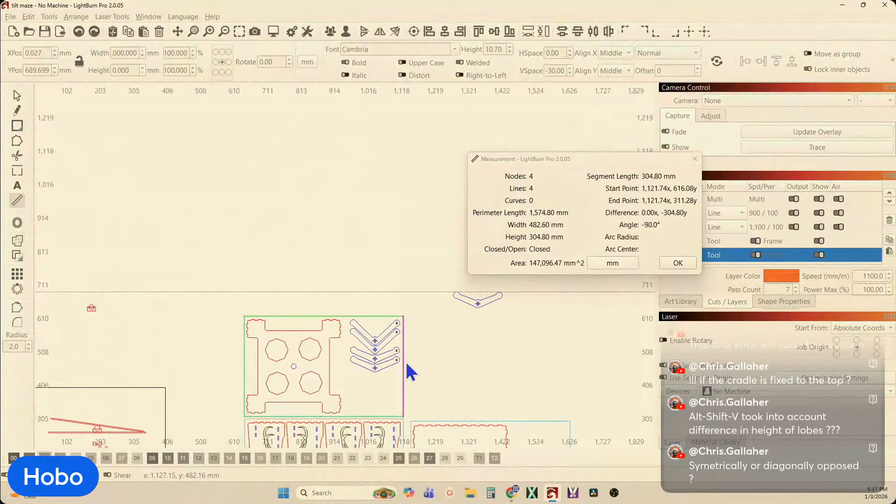If I come back over here, well, I'll use this. Here's one of the side pieces that I've got mocked up. So there is the lattice. There's where the lattice snaps in here.

So if I know that this is the pivot height, I can come in here, get rid of this right here, group that together, put it in the center, Alt Shift V, there we go. And then move that up. And actually, you know what, I don't even need that.

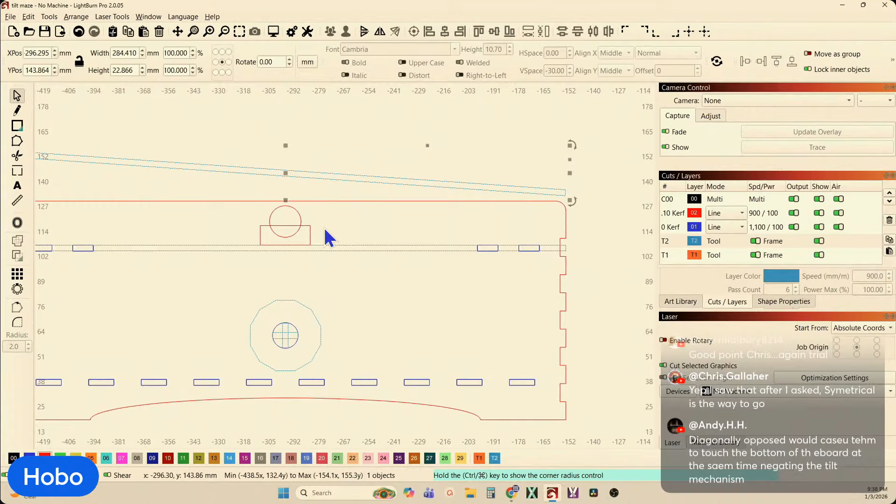That's the maze, but there's the pivot height. Now I need to give myself a little bit more height on the piece so that the maze stays inside there. So I'll just simply move that up a little bit. I've got my height, my pivot point. I know.

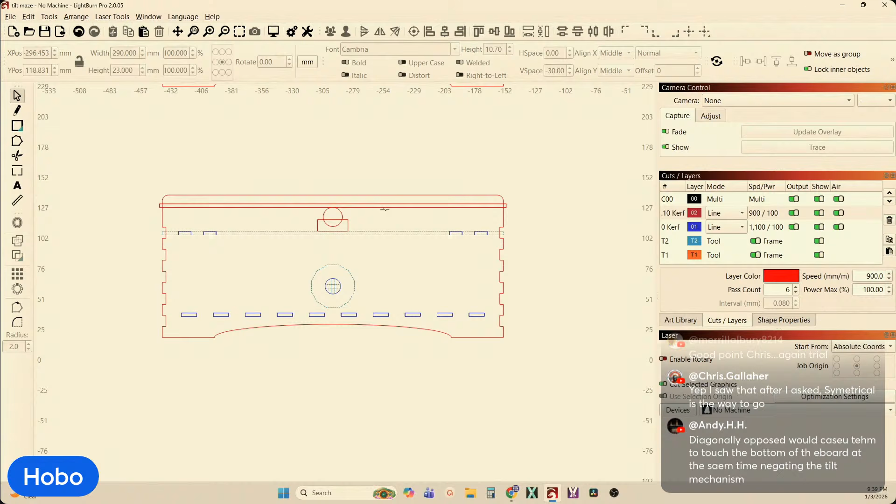We'll double check it. We'll say width is 290 and put it in the center. Alt Shift V, there we go. 290 is too big, so we'll take that down. I like that, I don't know - I'm guessing at that measurement right now, I'm just looking at rotation.

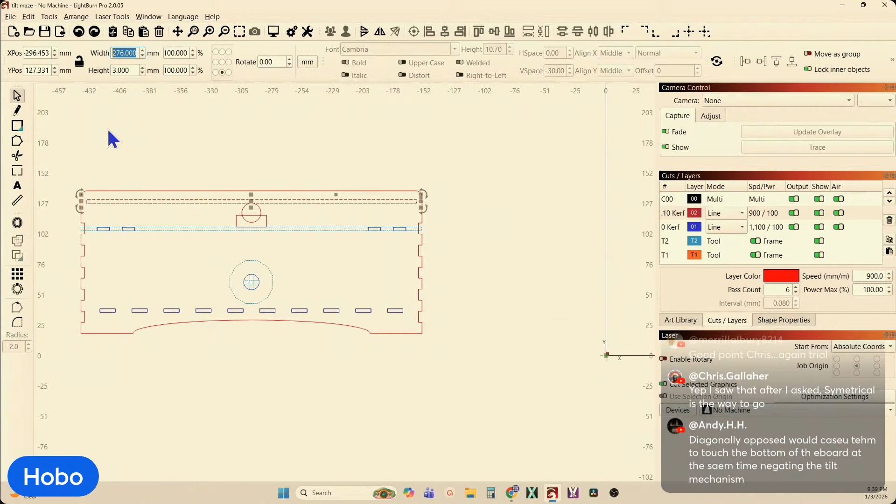Now if I take that and rotate it, bottom center, rotate it 8 degrees - there it goes, it sits right there above the lattice. I got plenty of degrees, 8 degrees of rotation. So that's positioned right, that's where that needs to be. I can work with that lattice now.

Now I need to figure out the height and position of my dowels. So we'll leave this, and this is the outer dial. Here is the actual size of the dowel. Actually, you know what, no. In the very beginning, ChatGPT talked about a caveat or design suggestion when using Lightburn.

And the reason was they were using square corners on all the windows, and they couldn't take the stresses of pressurizing, depressurizing, pressurizing, depressurizing, and it ended up cracking the aluminum. And then once it's pressurized, it blew out, sucked some people out, crashing planes. So that's why you have all rounded windows in your jets now.

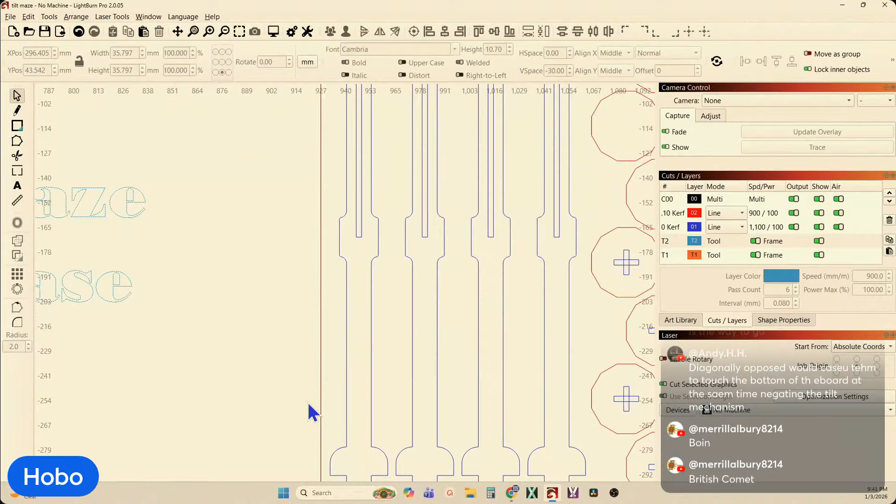Same thing here when I'm doing these pieces - anywhere that I could get away with it, they needed to be square, but here I didn't use square corners. I added material here around where it intersected to strengthen that up, but then I made sure I took the corners off of this so I could add more strength to where that intersected and locked up. The British Comet - okie dokie, that was the first one with the blown out windows.

All right, so if this piece - let's break them down to individual pieces - if this piece is 30 mil wide, get rid of that guy. Then that is the actual... and my palette's gone. Bring it back, there we go. Put that in the center.

So there is the actual dimensions of the dowel. I'm going to get rid of this for now. So now I know what my dowel size is. Currently I'm trying to see if I can salvage as much of what I've got without having to throw the baby out with the bathwater.

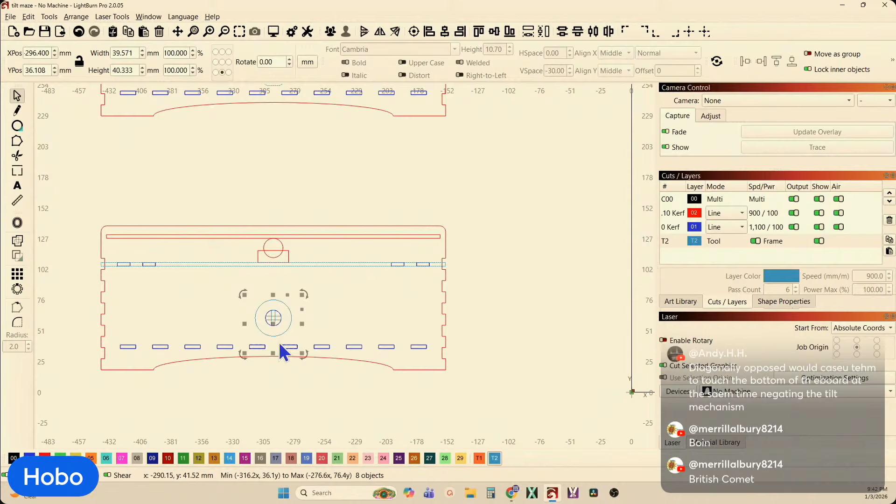So there's that one. If I duplicate that, Control D, duplicate it, and bring it up - oh, I got those, didn't need to. See, I don't have enough room there.

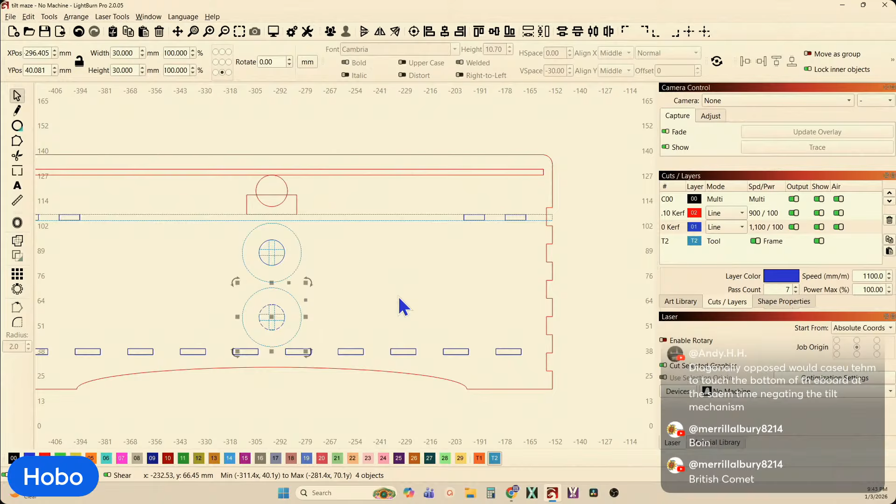So that one will need to be lowered. But I believe I can make this work. Because if I can bring those, lower the bottom a little bit.

All right, so now by changing the position of where my dowels need to be placed, I'm going to have to change the size of my cams, my eccentrics.

And to do that, this is my lattice. They're going to rotate here, and it needs to come up and contact the bottom of the maze, and it's going to contact the bottom of the maze on one point only, and then a millimeter less on the other side. So I'm going to just grab this guy.

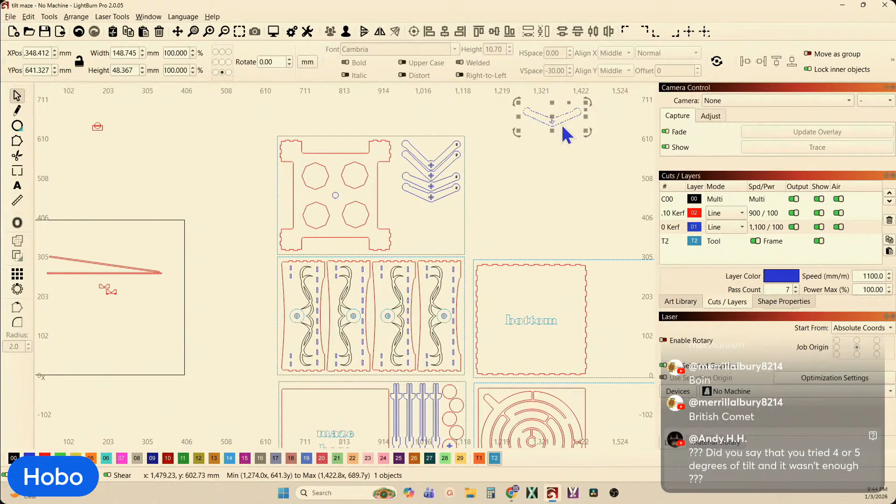Did you say you tried 4 or 5 degrees of tilt? Yeah, 4 and 5, because my initial design gave me about 4 degrees of rotation, and the marble, you had no control. You need 8 degrees of rotation in order to be able to control this top and make it a playable game.

And let's group these together. They are grouped. All right, so bring this down here. And let's put that right there. And now if I look, see there, it's not touching.

Well, if you're comfortable in Lightburn and you have a piece like this already, all you got to do is use your node editing to stretch these around. And I'm going to do that, but I'm also going to show you how to create these real quick. So that, because if you're going to do this yourself, you're okay, now I understand my pivot point and pivot point height. I understand where to place all this, but how do you draw those?

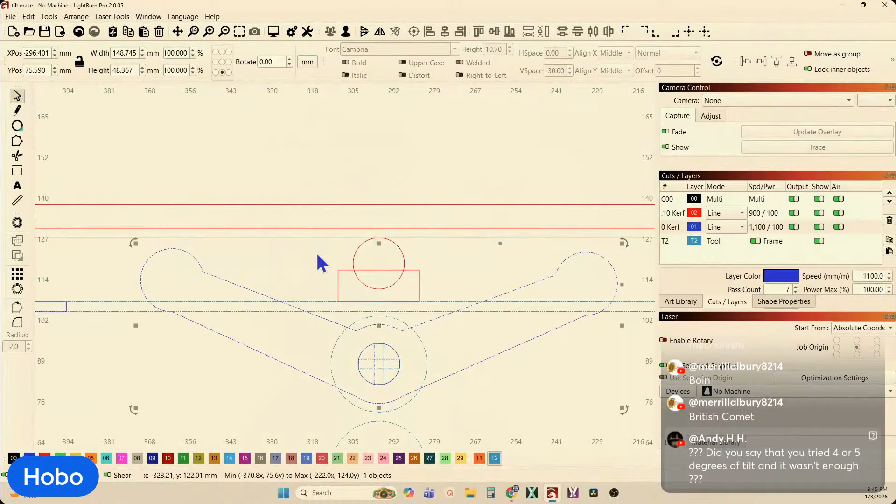How do you create those cams? Well, first I'm going to correct this one, then I'll show you how to draw one. I'm going to ungroup this, keep everything selected, go into node editing, grab every one of these on this round lobe over here, and I'm looking for where that makes contact with the bottom.

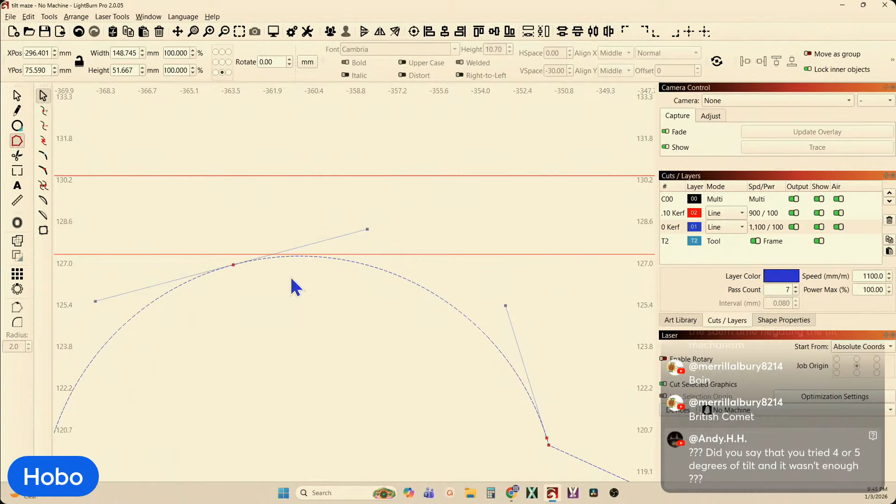Is, see, that's the lattice. No, I'm sorry, that's not the lattice. The lattice is down here. It's the tabletop maze. So I'm going to put it, we need to get a little more movement, or a little bit tighter movement. And I'm going to say 0.1.

There. All right. And then come over here to this one, and I'm going to move it up, and I'm going to put it exactly the same. And then what was my movement? Which one gave me 1 millimeter? This one will give me 1 millimeter.

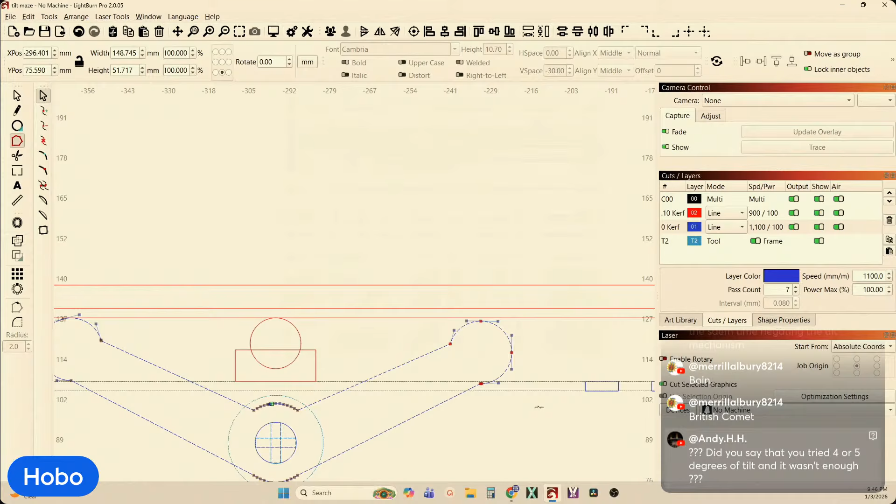Say okay. And now with those selected, I'll just move it down 1 millimeter. Up, not shift 1. There we go. That's 1 millimeter. So now I have modified that to fit that box design. And I've got everything still selected, so I can just regroup it and then just drag that out of the way.

So now I've got a modified cam for that. But now you need to create one, because if you're drawing this yourself, you've already understood how to create your height. You know where your tabletop's going to be. So, and you've now positioned where your dial's going to be. Well, simply draw you out a circle.

And let's put my layers keep going away. Have I got my zoom zoomed in? They go. Yep, if you noticed, I was zoomed in at about 175% or something a minute ago.

And that, boys and girls, is why my color palette kept going away. I had my windows zoomed in, and that was causing it to drop off my palette every time I went to look at it. Put your zoom at 100% in Windows, and it'll quit dropping off that stuff.

And Chris says, I just checked the math. 8.333333333333333 is optimal tilt. That's so 8 works.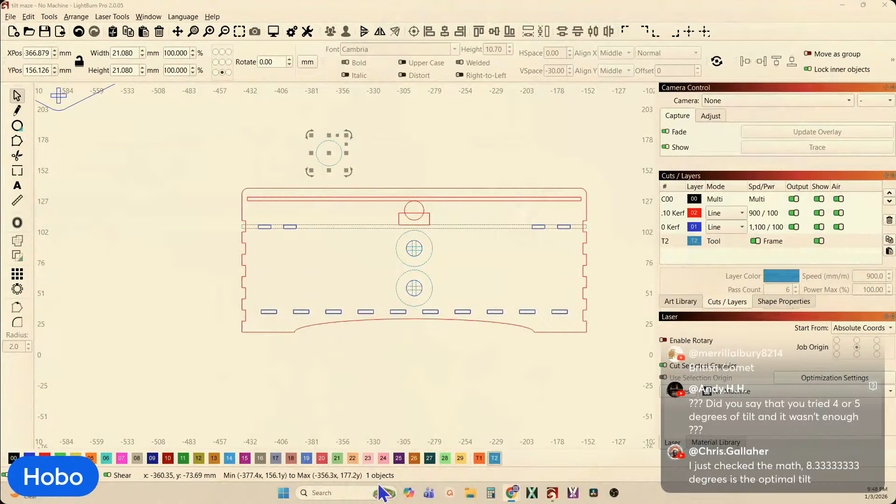All right, so now I fixed my zoom. I've got my color palette to stay. There we go. Put that. So I draw out a circle.

And if you're going to do a lattice, you need to know how wide, or you can design your lattice around your eccentrics. The further away from your center point, the more leverage you get. So it takes less effort when turning the knob in order to lift create the tilt. So you want to go as far out to, close to the perimeter as you can, and also as close to the corners as you can.

So the further away and the further out, the easier it is to lift and tilt the stuff. Now, for me, to keep everything easy to design...

In order to keep the design easy enough to assemble, whenever I was figuring out my lattice here and the size of the cams, how wide they're going to be, I looked at whatever the measurement was of the lattice, which here was right at 285 mil.

And I go to node editor. Oh, it's not a shape, I've got to convert it to a path. Convert to a path, go to node editor, and then I put a node in the middle by hitting the letter M, and that put it over there, and then I hit node M again. Right there is halfway between the edge and the center, and that's where I made my center point for my lobe.

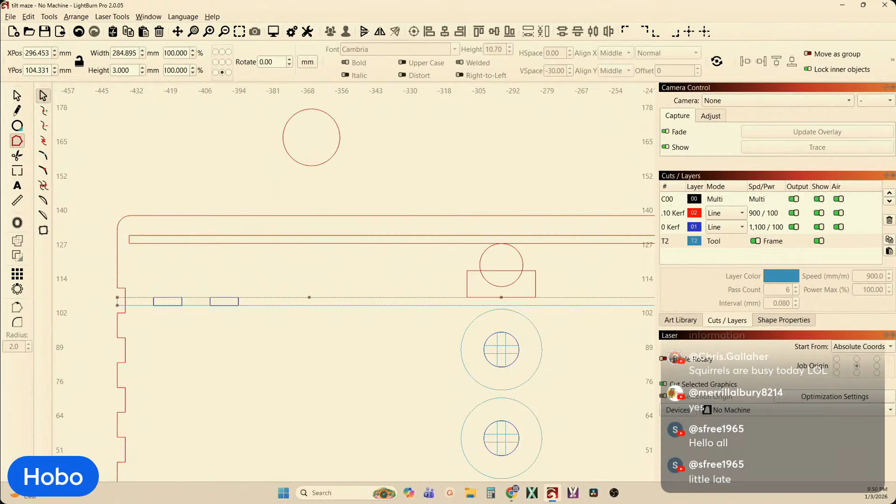Now, do you have to do that? I just did it for the symmetry and the looks whenever it's all put together. That just looks good. Delete that piece that I didn't need.

So if that's the center, and remember if we grab our line, it should snap in there somewhere once I get on a node, or it should. But when it doesn't want to, just go back, show your nodes. There it is.

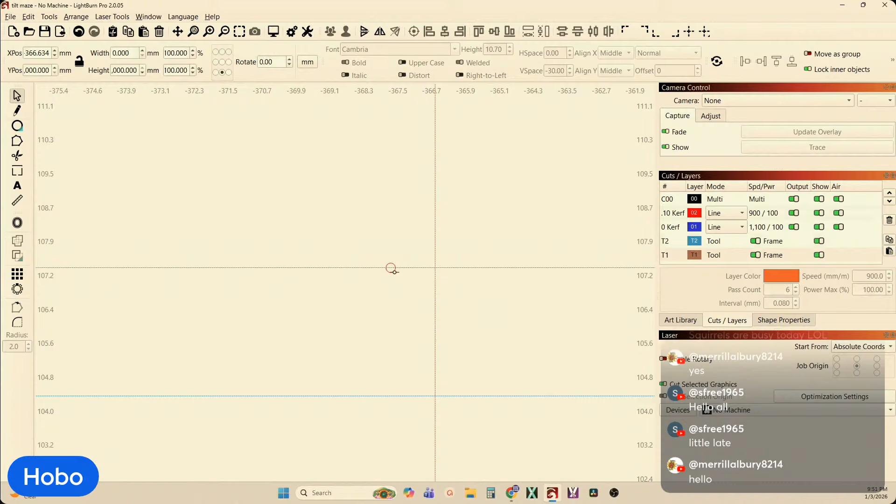Now I'm going to get a circle. I'm just going to draw a simple circle right there and put that in the center of that. Now that tells me that position. And if I put that in the center of that, that tells me the position that needs to be.

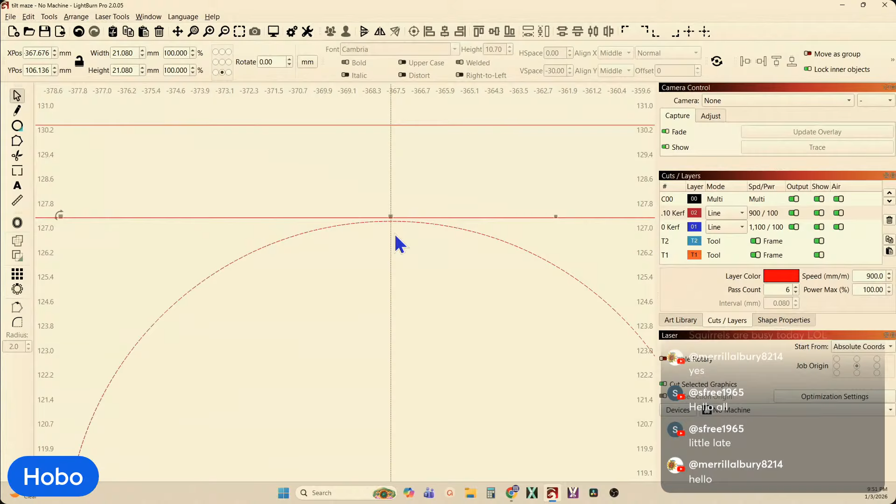Now I'm going to lower that down to where it's making contact with my maze. There's one position. I'm not going to do that over here.

I don't need to. Now I'm going to come over here, and if this is the size of my dowel, I'm just going to do an offset inward of that a little bit. There, that would be good. And say okay. Put that on. Now I just fixed my zoom.

I don't know why I'm losing my palette. I thought I fixed that. There we go. Put that back there. So now I've got a circle, and I've got a circle that's in the right position.

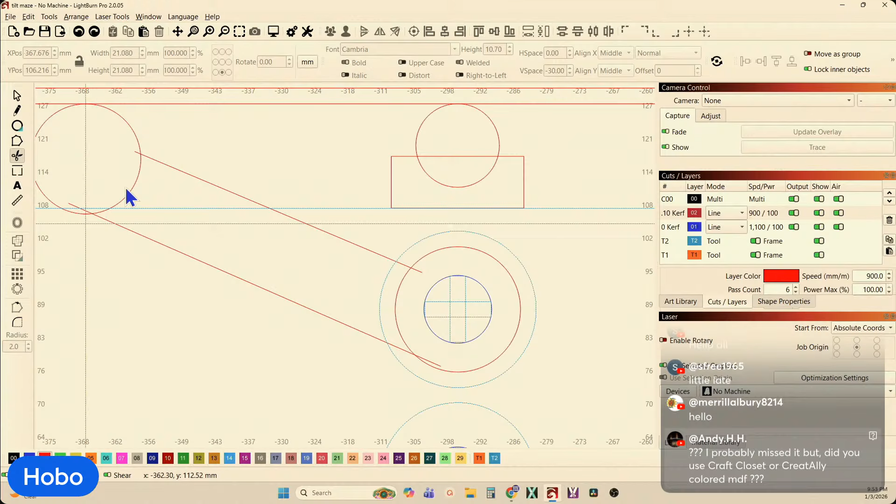I can just draw me a rectangle. I don't even have to draw a rectangle. If I want to, I can just draw a straight line. Just draw a line from there to there, and a line from there to there. And then use the scissor tools and cut away the pieces you don't need.

Delete that. I'm going to duplicate that, bring that up here, duplicate that again, and mirror it. And if I had my... there we go. That's the center.

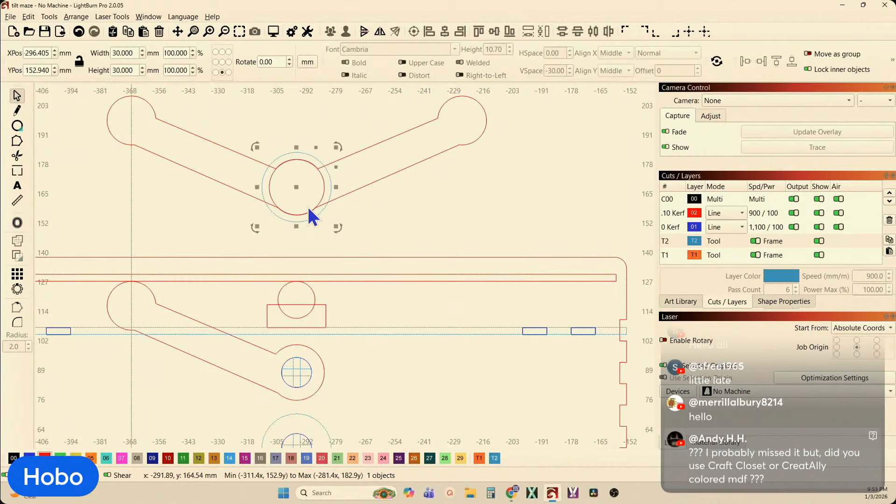And I don't even have to get too crazy about it, but I'll move that in a little bit. There we go. And then just weld those together. And there, by only creating one side of it, now I have a symmetrical piece.

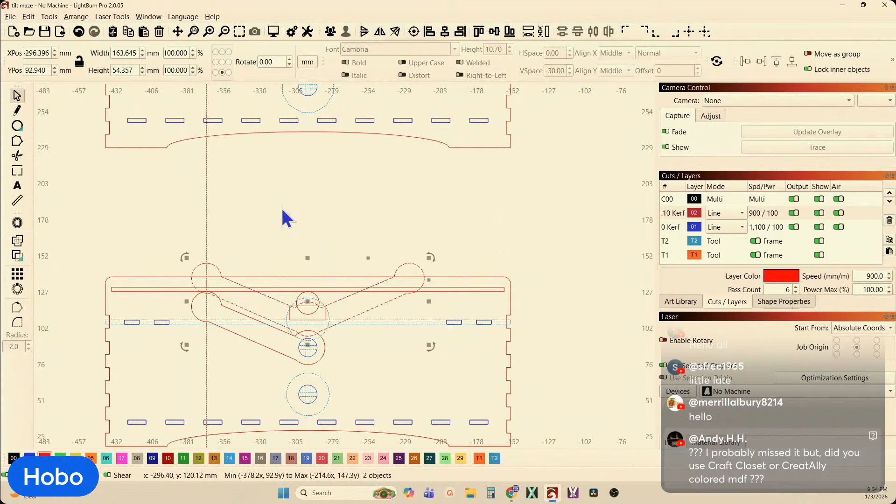Now I just need to lower that one down 1 millimeter. I can get rid of that one. Come in here to this, select node editor, and bring it down 1 millimeter. Done. And then I would put some type of X marks the spot as to which one has got the side that's lowered down a little bit, and put that on the engraving, or you can cut it out. It doesn't really matter.

I probably missed it, but did you use Craft Closet? Yes, I didn't talk about the materials in tonight's video, but yes, I initially did it in 3mm Baltic birch.

Not satisfactory. I had enough of this left over that Russ sent me from Craft Closet, and I am in love with this stuff now. Before being introduced to Craft Closet's MDF, I told people to stay away from MDF. It was garbage, it was junk, it was sawdust glued together. Well, this is not junk. This is extremely laser friendly. This is extremely nice stuff, and it's not cheap.

But the finished product is 10 times more attractive than anything you can do with the Baltic birch. Having all the different colors and the variations, it looks super, super slick. And it's stable. You don't need a tabletop from your maze that looks like that, where it's completely warped, or it can change depending on the humidity in the room at the time.

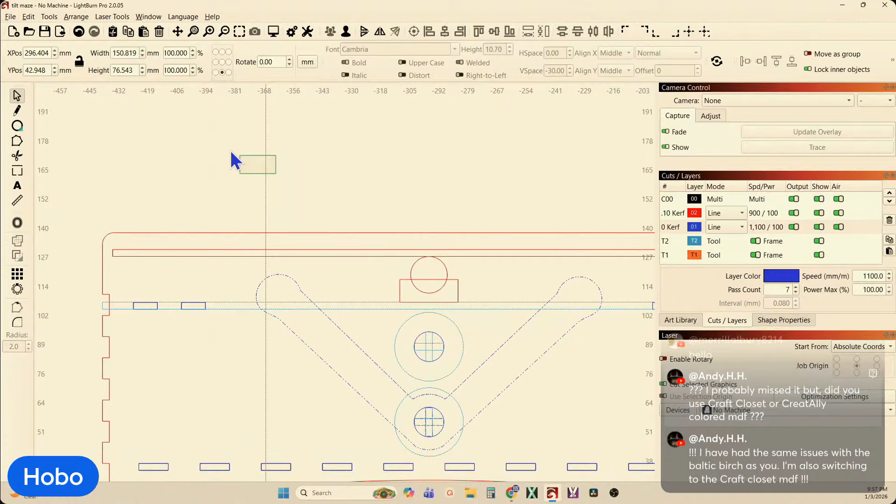Now look at what modifications I need to make to this one. Ungroup, node editing. Oh, there we go. And group that back together.

All right, those may be the only changes I need to make to my design once I get the new material here, get these cut out, and see what happens.

I have the same issues with the Baltic birch as you. I'm also switching to craft, but it depends on what you're making. I like my Baltic birch for doing my arts and crafts and the small stuff. But for this purpose...

Having that stability is crucial, because that Craft Closet material isn't cheap. Now if you're not aware, I was told by the guys at Craft Closet that they prefer you order it from Amazon.

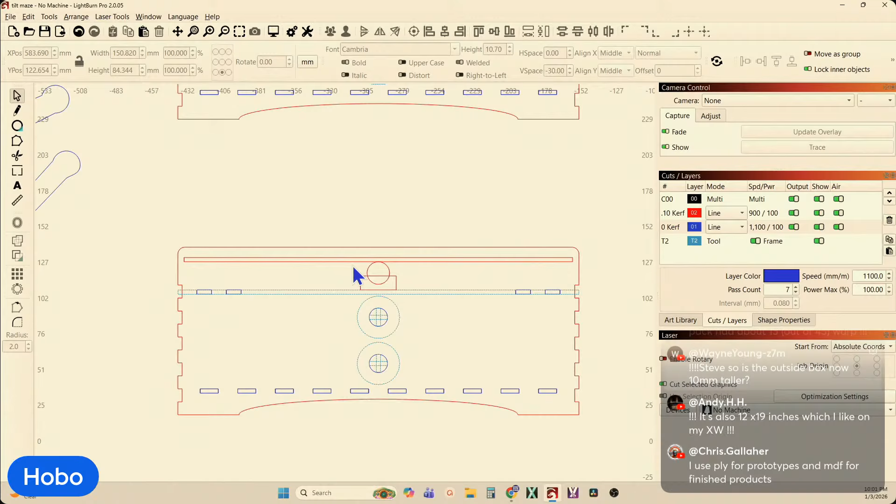And whenever we go back over there... what is it? I don't know that this is enough or not. Let's take this, put it at the bottom, and rotate it 8 degrees. So there's what little bit would be protruding.

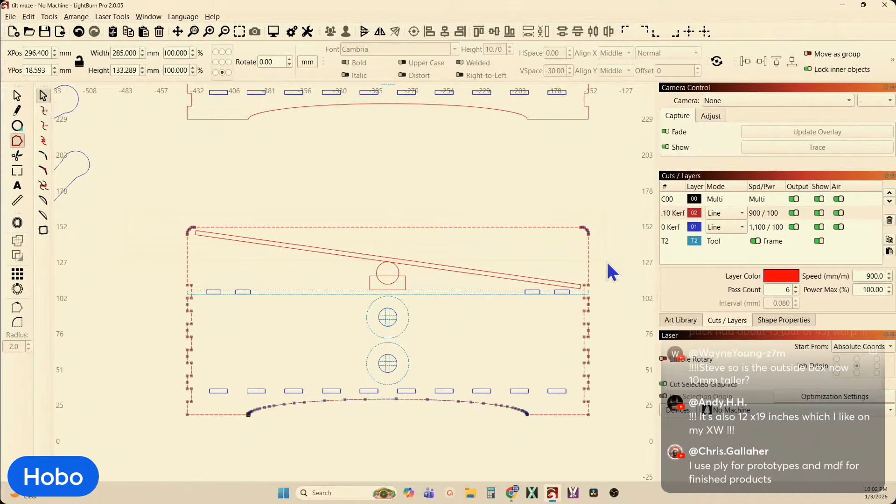So there, at full rotation, if you wanted to have the tabletop maze completely constrained, not ever popping up, then you would need to lift that even further, like that. But that may be what I end up doing.

But what I'm looking at before I start putting the final dimensions on that is the material, because the way I had it set up, I was able to get all 4 sides out of a single 12 by 19 piece of material.

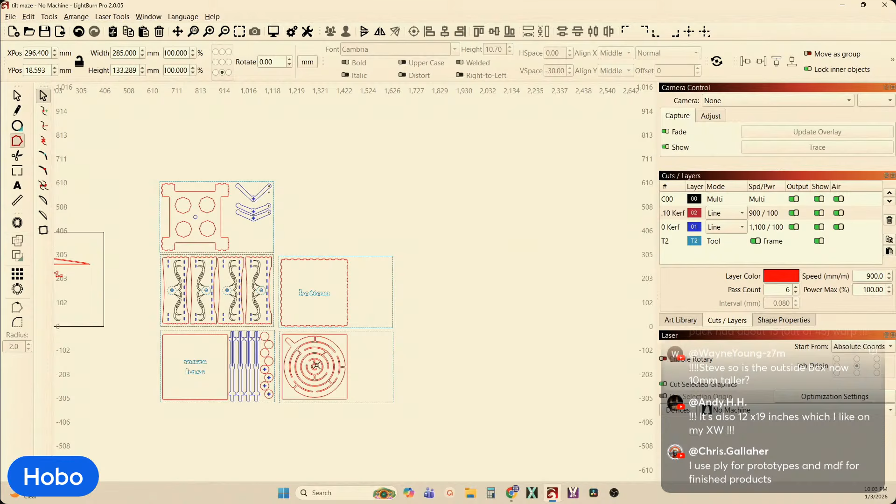So the sides was done with one piece of material, and now that I'm having to make that taller, I ain't gonna be able to do that. But I had a lot of waste here and here, so I can make 2 here and 2 here and still not use any more total material than I did initially. So I'll be looking at that before I put my final dimensions on the actual height of the box.

And yeah, these are the 12 by 19 sheets that I ordered, 17 of them for $100. It looks like Craft Closet has the same, but I have to double check that. And if that's the case, I'm going to contact him back and tell him, hey, why did you tell me to do that? Because you just cost me $25. I don't know if it's the exact same pieces or not, but I'll double check it. Good looking out, all right.

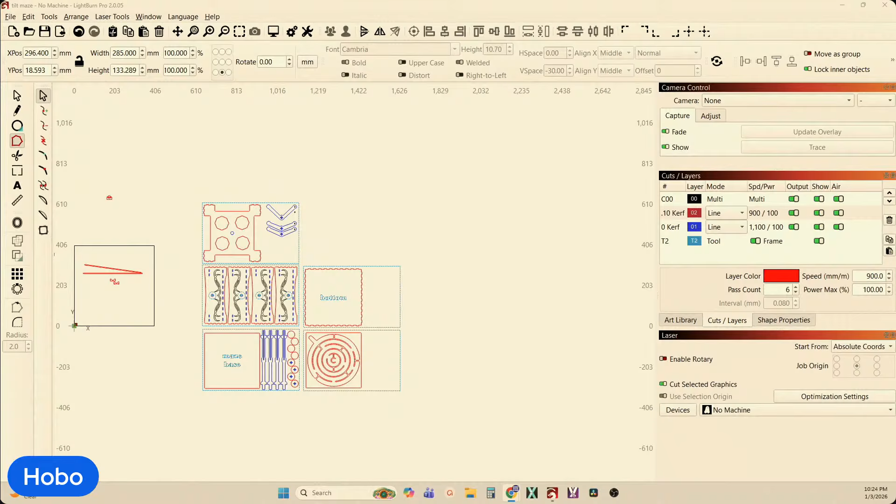If you've been using it and go back to try to use it, don't just left click on the devices. Come over here to your devices, and not left click, right click. Right click will reset your connection. I don't know my left from my right, but right click resets the connection.

Jack says you could have one more layer attached under. Yeah, so you could do a double-sided. I think it's what we're talking about, doing a double-sided maze, I think.

Chris says multiple ghosts for each laser. Yep, I don't even bother with the different. My ghost machine is just a 12 by 12 work area, and I go.

I have that same reconnect issue with my Mac computer. Yeah, and that's why I don't think it's a laser problem or a computer problem. I think it's an issue within Lightburn, because some folks were saying they had problems, and Lightburn made some corrections and fixed some things, but there's still an issue connecting to the Rolly. It just won't do it, I have to reset it. But Chris is saying, yep, that's an operating system not reinitializing the port. Lightburn thinks it's still connected.

Well, it never, ever, ever did that, until I went away from 1.7. But in fact, I'd be willing to bet you, Chris, that if I rolled back to 1.7, that problem wouldn't exist.